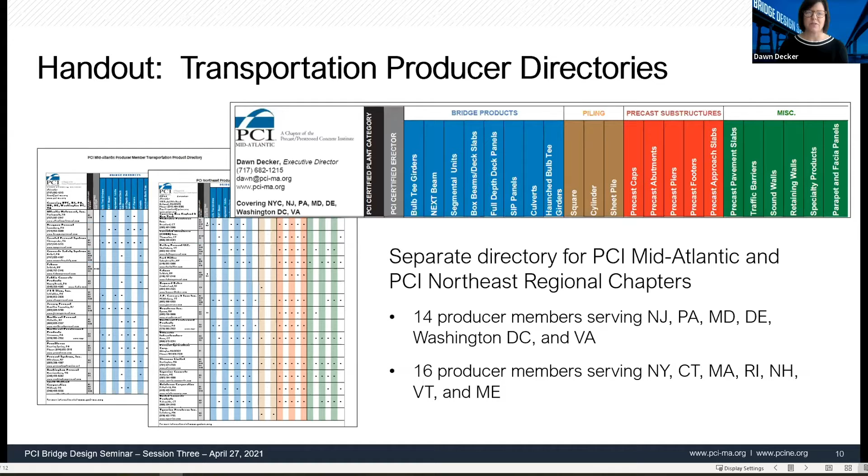PCI Mid-Atlantic and PCI Northeast, you see these pictured on the slide here. There is one each for each of our chapters, our transportation producer member product directories. So on this, you will have contact information, the name of the companies, as well as the respective products that they produce. Those products are grouped into bridge products, piling, precast substructures, and miscellaneous transportation products. Please use those, download those, and contact the producer members for a variety of services, which Rita will talk a little bit more about as well.

In terms of education opportunities as well as publications, Rita will speak to this handout, which is PCI recently published, a new 2021 Transportation Publications and Online Resources Catalog. Rita will speak more specifically to these publications as well as the on-demand learning courses that are available for you on a wide array of subjects.

Now, getting started in terms of our program today, Rita Seraderian will start us off with a review of the PCI Body of Knowledge. Following that, Reid Castrodale will cover lateral stability. JP will have back-to-back sessions with girder repairs and fabrication issues, as well as UHPC for bridge elements. And Mike Culmo will review NEXT Beam guideline updates. JP, Mike, and Reid will facilitate our fabricator panel discussion. Please submit your questions so that we can address those during that panelist live discussion.

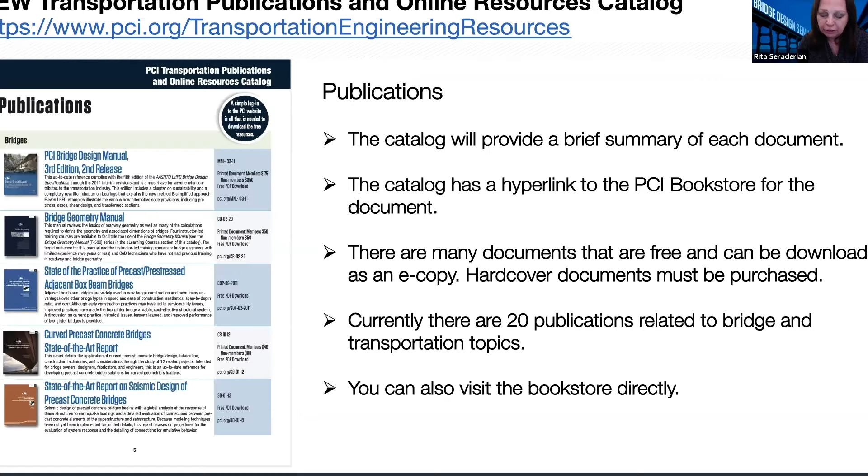If you can't find the actual transportation resource catalog and you just happen to go right to the PCI bookstore, I want to show you that you can get there in the same manner and download some of these same documents. If you go to pci.org, PCIMA, or any of the PCI.org organizations, you'll click on the publications tab, and that will open up to bookstore and periodicals.

I do want to note, we have 3 publications: the Ascent, the Aspire, and the PCI Journal. The PCI Journal is a technical publication. The Aspire is really our industry magazine related to transportation, and it's actually free. You can view all of the documents, all the past publications, on the website, and read anything that's current there too.

PCI is always looking for projects to feature. If you do have a nice bridge project that you would like to potentially get some PR, you would want to contact Reid Castrodale. He would be more than delighted to work with you on potentially getting a story into that document.

So moving back to the bookstore, if you click on the bookstore, it will bring you to a page that looks like this. You would click on transportation infrastructure, and it will filter all the publications related to that topic.

Sorry about that. It jumped on me. Yeah.

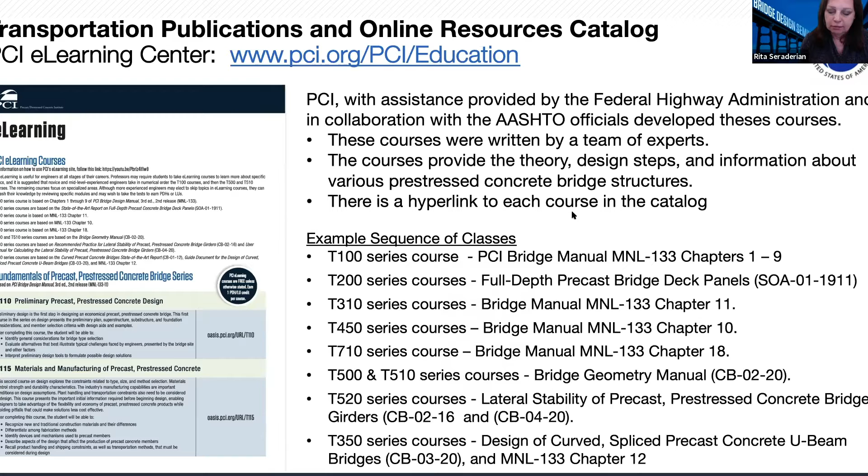I'm noticing my thing won't go forward because we keep getting people trying to get into the class, and it's locking the screen up. Again, you can get to that document through the e-learning center, through the education tab.

I do want to note on the education tab, there is also other bits of information available to you. We have monthly webinars that are free and on demand. There's the PCI Academy, which is a fee-based class you can take live. And then there's the e-learning center, which I'm going to go through here in a minute. Finally, we also offer live and virtual lunch and learn programs. If you want Dawn or I to visit, please feel free to reach out, and we would be delighted to schedule a program for your office.

So going into the actual e-learning center, this is what it looks like. You can filter the transportation courses. There are also building courses there, so it's not just transportation.

If you click on transportation, it will filter all those courses, and then you can sort them in alphabetical order. So the T100 courses would sort to the first level.

One quick note before the next slide: if you click on technical resources, there are two schools that were part of the PCI Academy. They're not live, they've been recorded. So if someone is new to prestressed concrete and hasn't taken a class at a university, and wants to learn the basics before diving into the actual bridge class, there's a 6-module, 90-minute each class that's free. You can go in and listen to it. It was pre-recorded by a professor who was presenting it, so it's a good opportunity to learn the basics. We also have an advanced version, but that's a fee-based class.

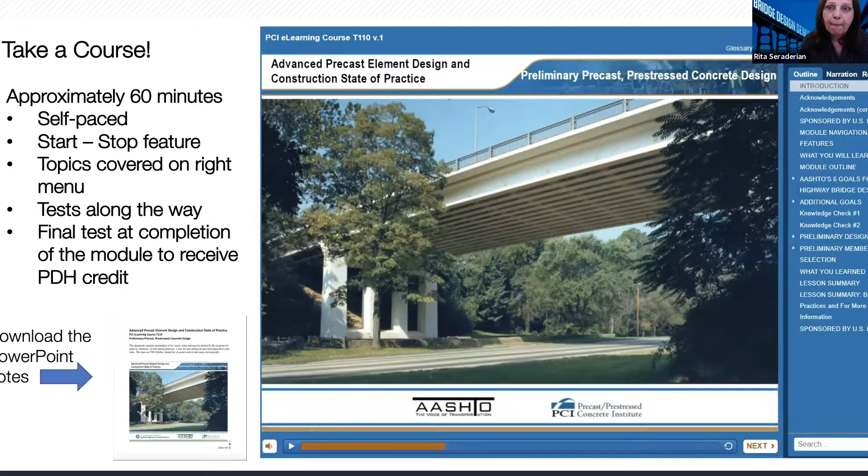So what's new? The NEXT Beam guidelines are brand new—we just posted them, calling it the second edition. Mike will go through the details of what's changed, and for those who've been using that document, you'll be able to learn what's different.

The next document I want to note that's relatively new is the full depth deck panel guideline. We posted that last May—it's got a lot more information. I'll go through a couple of things we changed in that document just to bring you up to speed.

The other available documents are the Stay in Place Deck Panel Guideline, the Northeast Deck Bulb T Guideline developed back in 2018, the Camber and Profile Management for Adjacent Members document published in 2018, and finally the Resolution of Nonconformances in Prestressed Concrete Bridge Elements, also posted in 2018.

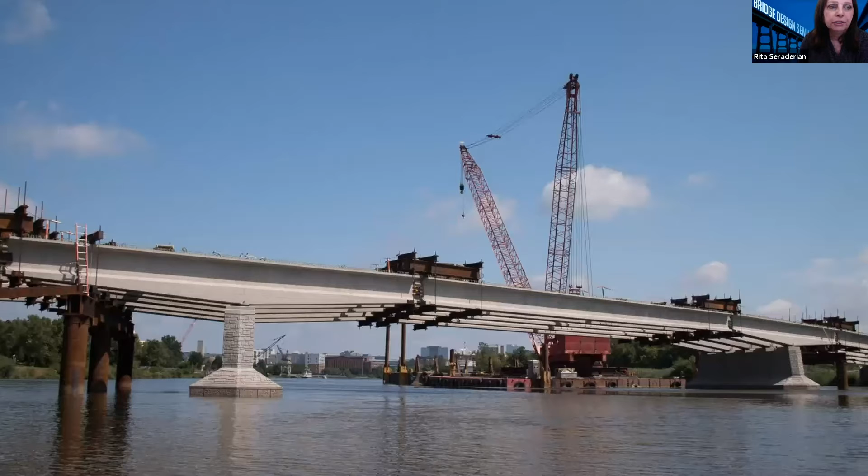Well, thank you, Rita. I appreciate that. Hopefully everybody can see my screen now. It's good to be here, and Rita didn't mention that her picture, as well as Mike Culmo's picture, and I don't know if anybody else on the call today, are also in that photograph she showed, but there are others who were involved with that girder who are still kicking around here.

Well, what I'm going to be talking about is lateral stability. And it's a topic that we're seeing a good bit of.

What we're talking about is that stability can be an issue for long girders, but one thing to bear in mind is that long is really a relative term. It's really an issue of slenderness and lateral stability rather than just length. So that's something to bear in mind, but typically we think of stability becoming an issue as we stretch out our girders, as we're able to do now with high strength concrete and 0.6 inch strands.

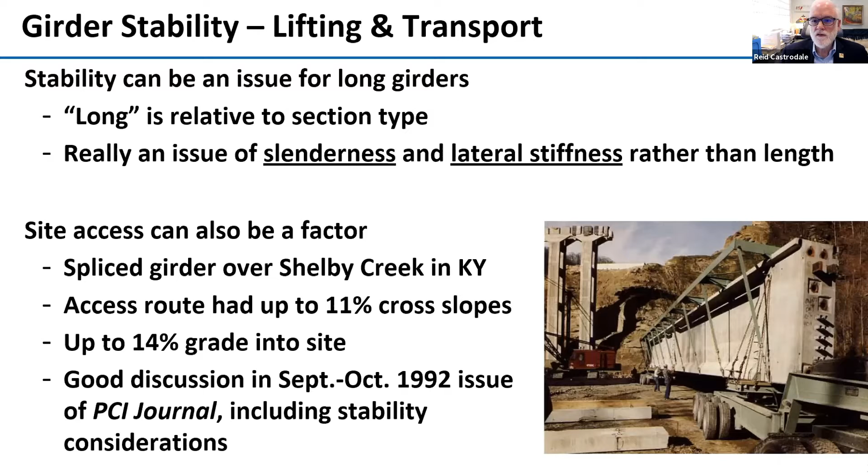So, as you can see here, they put a truss on the top flange, and they also added some strands in the top of the girder. There's a good discussion on that, so if you want to take a look at it for interest's sake. This was before we started a lot of our discussions on lateral stability, but these designers took it into account as they worked on this design, which is a good example for all of us.

PCI has recently published a recommended practice for lateral stability. There's also a spreadsheet that's been developed that executes the equations and calculations gone over in that recommended practice, so there's now the spreadsheet and an instruction manual. Actually, what you do is download the manual and then get a link for downloading the spreadsheet. Those are available on the PCI resources that Rita went through just now.

There's actually already been an errata for the recommended practice, and an update on the recommended practice is underway, but it'll probably be a year or two before it gets completed.

One thing I'd recommend is, as Rita was talking about, you can get the e-learning courses on lateral stability, and there are four of them. They're in the T520 series. You can get those on the e-learning center on PCI. So I can only hit a real high level discussion this morning, but you can get much greater depth if you take that series of courses, which again are free.

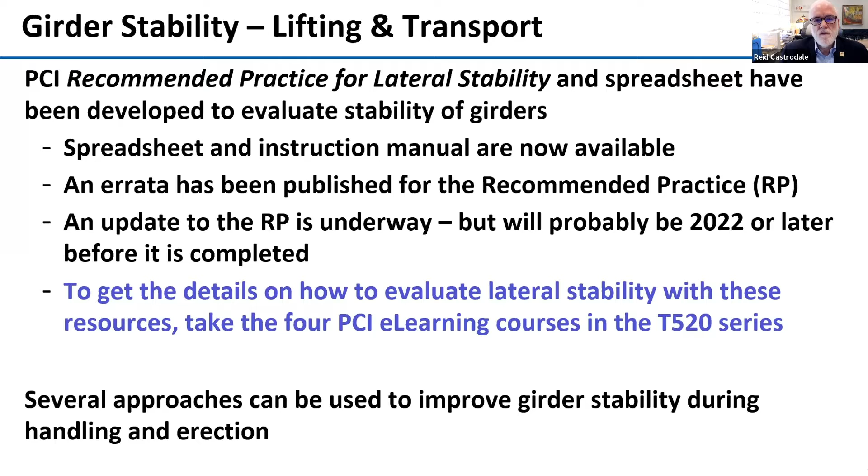Now, there are a number of approaches that can be used once we design a girder, or as we are designing a girder, to improve stability for handling and erection, and we're going to talk about a couple of those now. One of the major ones is that we can move the lifting loops in from the ends, and also the temporary supports, either for trucking or for dunnage during storage. You need to move those in and you'll improve the stability significantly. However, we have to check the stresses.

If we're lifting from further in, then we now have a cantilever at the end, which gives us some negative moment at the lifting points, and the stresses are not usually checked there when we're doing a design. So I would encourage you all to take a look at that.

Some DOTs also have a maximum distance to the lifting loops indicated either in the standard beam sheets or in the specs, and we need to be careful about that. Lifting at about 1.5 times the depth of the girder in from the end is a good rule of thumb. But if it's specified as a distance from the end, like 3 feet, it can lead to problems.

Years ago, there was a story told, probably 20 or 30 years ago up in Minnesota, where one supplier had been fabricating girders for a good while, and they knew that they needed to move the lifting points in from the end. Then a new fabricator came in, the specs said lift them at 3 feet or whatever from the ends, so they picked this long girder up from the ends and it rolled over. And they said, okay DOT, that's your girder, we built it like you told us to.

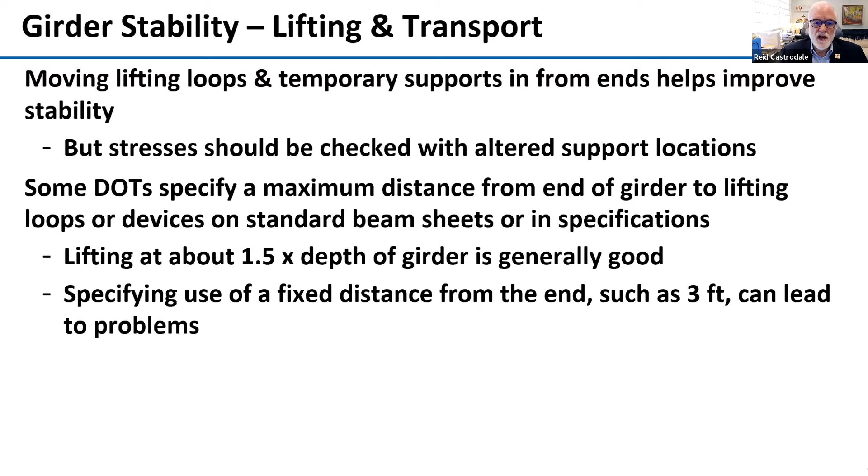They may be different. Another thing that is always assumed is that the girder is rigidly attached to those trucks. So we need to just be sure, and that's something that's in means and methods for the fabricator, just to be sure that those attachments to the truck are indeed pretty rigid, a good stiff connection.

It turns out if you raise, using a rigid device, that point of rotation above the top of the beam, then you get a longer resisting moment arm, so that improves significantly the lateral stability. There are a number of approaches you can see here with rigid links coming up through the top flange, like here and here. There's some things that are attached on the outside.

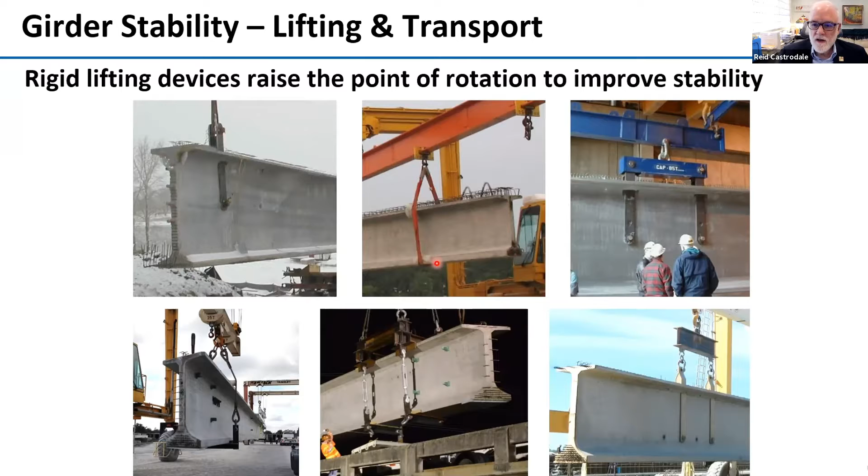And you can also use a sling. Now, a sling itself is not rigid, but when you put it in this configuration, it does become rigid and can be used to improve the stability of a girder.

In some cases, exterior frames are applied. This one right here is the Shelby Creek Bridge that I mentioned earlier. They had a nearly full length frame attached. Here are some other frames that have been attached to these girders to improve their stiffness, to improve the lateral stability.

It's not always required. In fact, it can, in most cases, be taken care of now that we have wider top flanges on our beams.

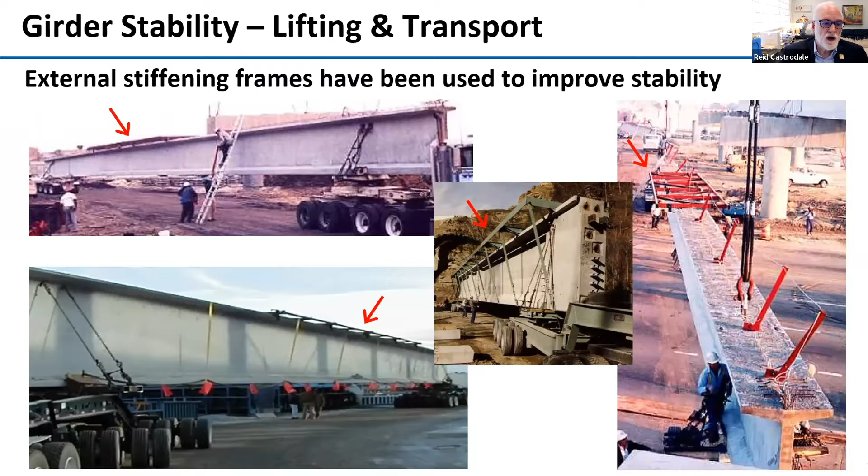In design, we can also add top strands to the top flange, and they can improve stability because it makes the top flange less likely to crack, which is when you lose stiffness and then lose stability. It improves the stresses for lifting if you're moving in the lift points, but it does affect some designs. I discussed this in a previous presentation in this webinar series.

In most states, designers aren't given the responsibility to consider conditions other than transfer and final conditions on bearings. So that's all that we have in the past typically designed for. However, that's not what we really need to take a look at.

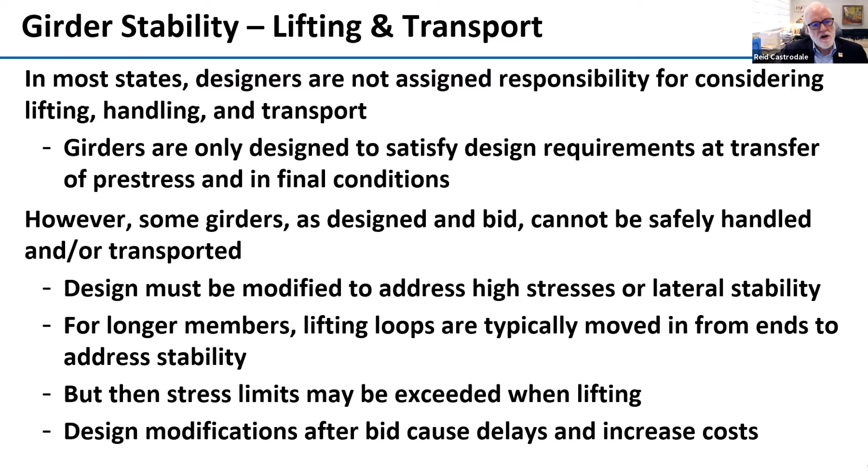Some pre-stressors have had the experience that they receive a girder designed, and as the girder was designed and bid, it really cannot be safely handled and or transported. In that case, the design has to be modified to address either the high stresses or the lateral stability issues. But typically what's done is moving the lift loops in, but as you move the lift loops in to improve the stability, then you exceed stress limits when you're lifting it, and a design modification is required, or adding reinforcement or other strands, whatever it might be.

And anytime you have a design modification after bid, that causes delays and increased costs. So we need to consider that.

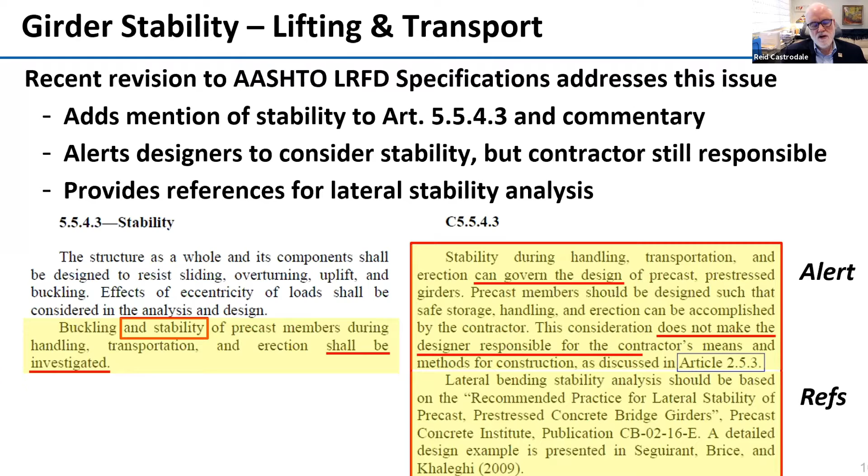What's being encouraged now in the specifications is that we consider stability. Here we can see some text out of the LRFD specs, the 9th edition, 2020 version. The first item speaks about adding stability for what shall be investigated. This is 5.5.4.3 on stability in the specs, and the words 'and stability' were added back probably 4 or 5 years ago. In addition, the commentary alerts designers that handling, transportation, and erection can govern the design. But if we consider it as designers, it doesn't make the designer responsible for the contractor's means and methods. This commentary also gives references, the recommended practice from PCI, and a detailed design example. So it's good to be aware of this information that's now in the specifications.

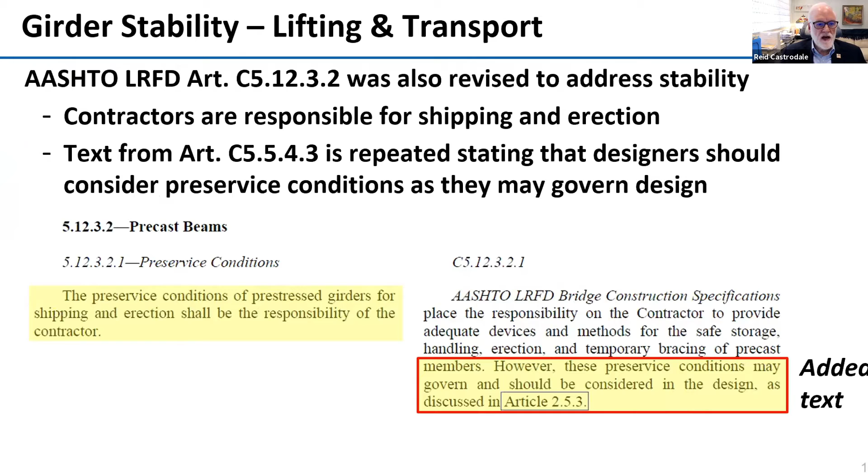Also, there's some text in section 5, article 5511, on the specification side. This text has been in the LRFD since 1994 when it was introduced. It says that stresses and deformations for critical stages during construction, stressing, handling, transportation, and erection have to be considered. So that puts us on the hook to consider them. We aren't responsible for getting it there and making sure it can be erected safely, but we need to consider that.

But how do we know what to do? How do we know where the girder needs to be lifted? How do we know what kind of transportation is going to be provided and all that sort of thing? Well, we have a couple of good examples of some approaches to handling this.

WashDOT, Washington State DOT, has developed a great approach. They've developed this over a number of years, so it's been tested out and they've shaken the bugs out of it. They do not want fabricators to change a design in order to make it work. They want a girder that when it's bid, can be fabricated using that design. So they don't want designers or fabricators to have to go fiddle with the strand pattern, move lifting loops, all that sort of thing. So all of that is considered in the design. Designers check those using parameters provided by WashDOT in both the specs and the bridge design manual, and that way the designers can handle it. Their design software up there also includes all of that information.

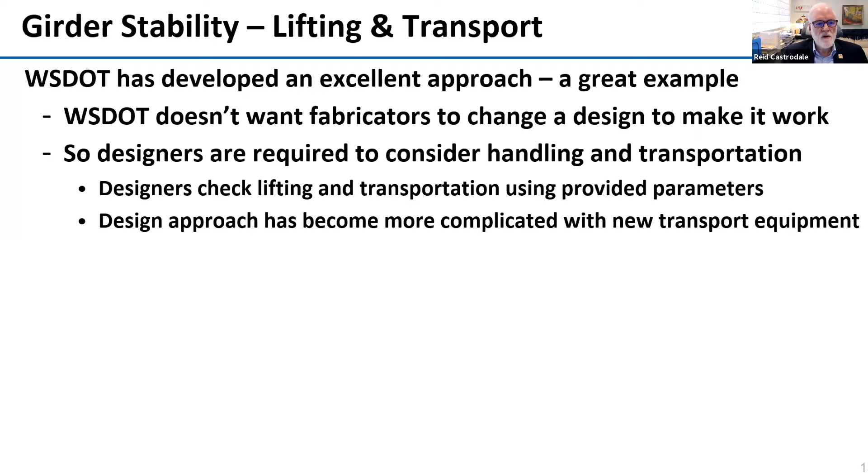It has gotten a little more complicated because they've gotten some new transportation equipment, and there's an approach they've come up with to deal with that. There are a number of good references. I'd highly recommend anybody wanting to be proactive and do some lateral stability analysis to check these WashDOT references. There's a PCI journal article, there's an Aspire article, both are excellent. The bridge manual and their standard specs both address lateral stability and provide information needed for the evaluation. And there was a great presentation that Rick Brice gave from WashDOT to the Georgia Carolinas PCI meeting back in August a year ago, with a PDF of that presentation and all the supporting information, including the bridge manual and standard specs sections, available at the reference provided.

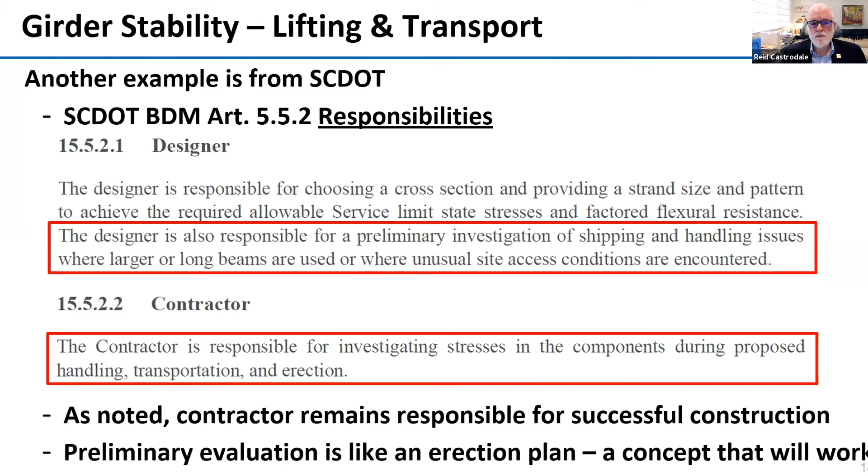South Carolina DOT, down in my region, states things this way: they give the designer responsibility for preliminary investigation of the shipping and handling issues. But right after that, they say the contractor is still responsible for taking a look at it, so he remains responsible for getting the girder there and erected successfully. The preliminary evaluation is essentially like an erection plan, making sure that girder, based on some assumptions you're making, can be successfully fabricated, transported, lifted, and handled. So it's essentially like an erection plan as far as how responsibility is handled.

One other example is from Georgia DOT. They actually have a table in their bridge manual that provides maximum beam lengths for each of the girder types they use. Those maximums are set based on stability considerations and also an assumed distance in from the ends for lifting loops. Designers can use designs greater than that, but then they have to do a stability analysis.

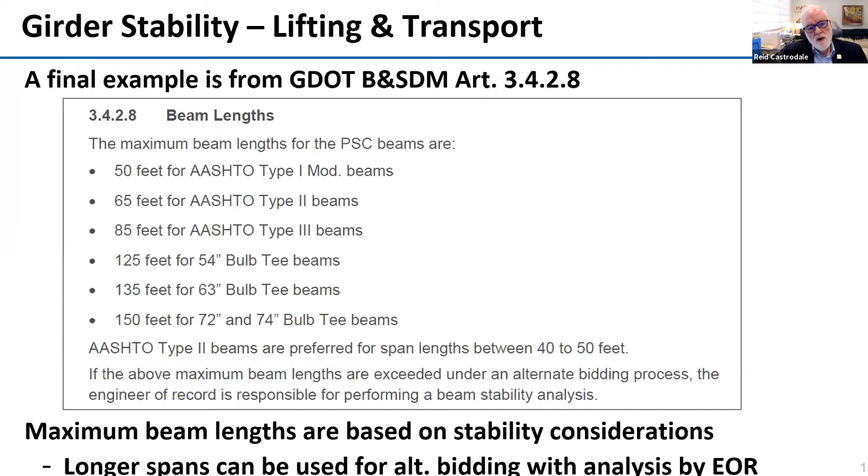So in summary, we're starting to use longer spans. Lateral stability may become an issue, and also stresses can be exceeded, and in some cases design modifications are required for girders that are received as designed.

But now we have some good information. There's some new information and requirements in the LRFD specs that have helped out and better defined the responsibility of the designers. And PCI has developed some excellent resources as well. So I would encourage owners as well as designers to consider implementing these new requirements.

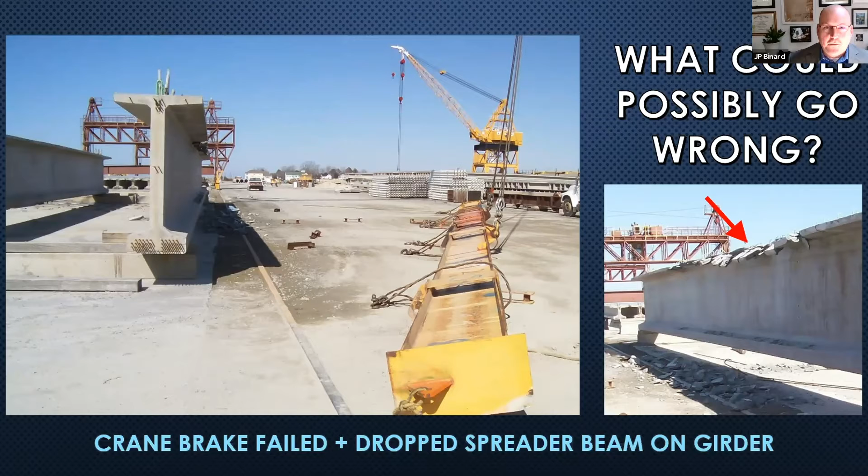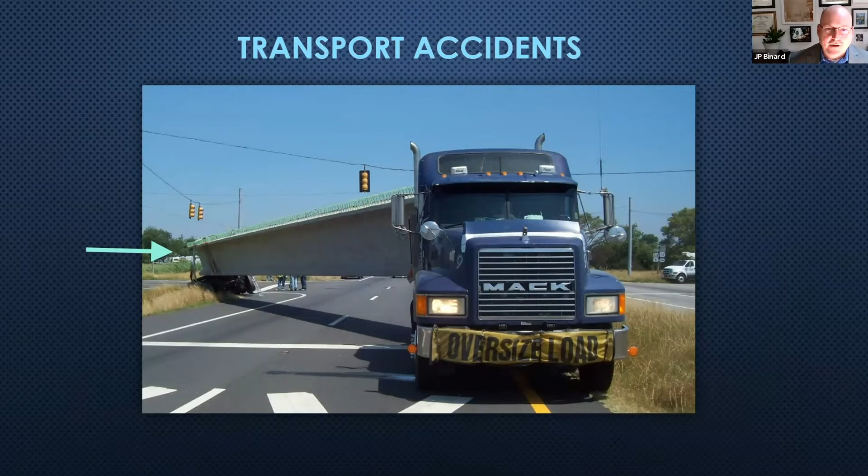So when we're in the fabrication facility, we need to make a game-time decision, right? We have something that may not be conforming. We don't know what to do, but we have to decide quickly.

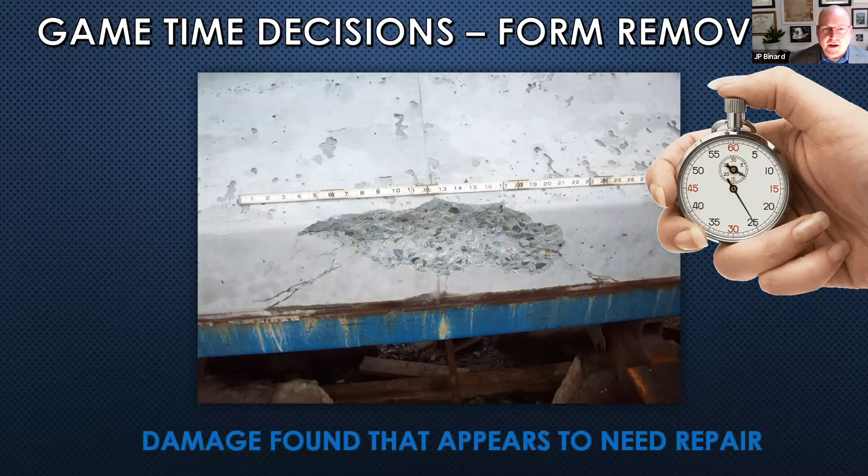So there's lots of things we have to take into consideration, right? Is the repair best before detensioning, or can we do it in storage? How will the damage affect the girder? What repairs prior to detensioning will be pre-compressed? We want to keep that section elastic, right? Keep it pre-compressed.

And if you do an on-bed repair, as Reid had mentioned, the cycle time and things that come into play for fabrication—you can't necessarily hold up the production to wait for an approved procedure. So these answers are always needed fast, and they have to be quickly executed.

And so this is really why, back in 2006, the PCI MNL-137 was created—the Manual for Evaluation and Repair of Precast Prestressed Concrete Bridge Products. A group of owners, designers, producers, consultants, and universities all came together to look at what are the common things that occur at a plant and what are the reasonable things that can be expected for the plant to administer under the QA/QC plan.

I meant to mention as well that PCI Northeast, as Reid pointed out, updated this manual in 2018. PCI Northeast has a broader product base where they've expanded it to include deck slabs, for example, and substructure units. I greatly encourage you to look at that resource as well, the link is included from the Dropbox. Currently, PCI MNL-137 is undergoing revision and will include a lot of those things that are in the Northeast publication.

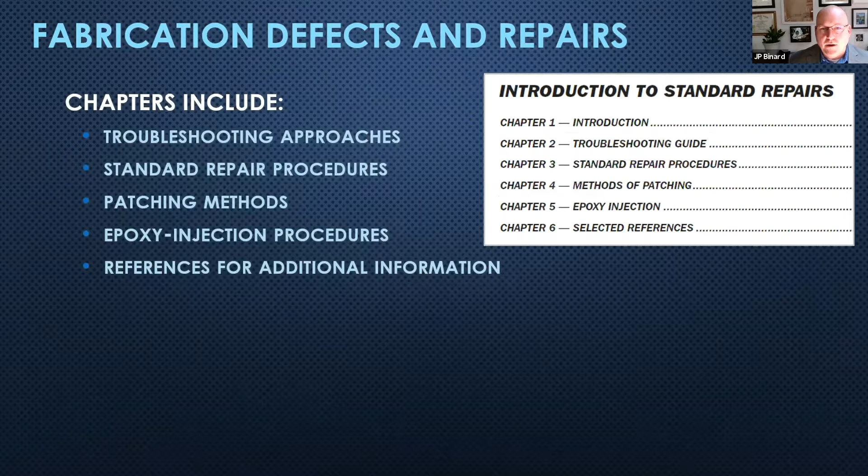The layouts are similar between the two documents. There's an introduction, troubleshooting, standard repair procedures to keep in mind, methods of patching, epoxy injection for cracks, and then the references that are available. It's broken down into causes, prevention, engineering effects, and repair considerations. So here's the general layout of the manual. If you're not familiar with it, I strongly suggest you download it from the PCI website. It's a tremendous resource, even though it was published in 2006 and is being updated. A lot of the information will be untouched and preserved.

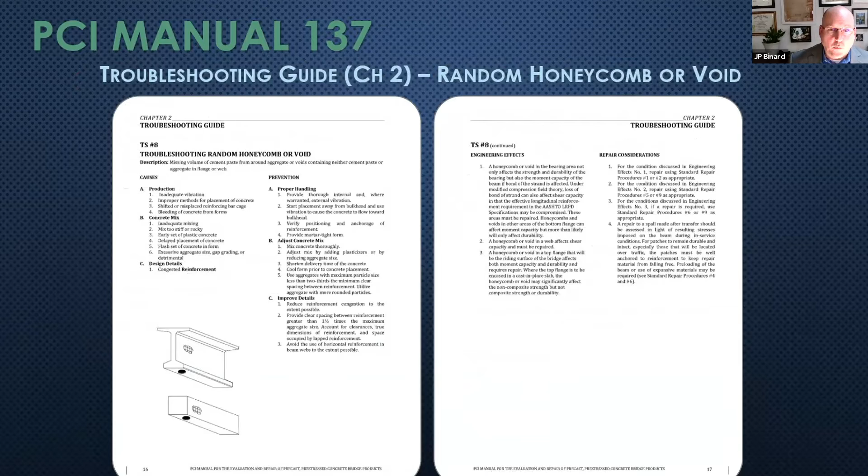So you can see there's causes. For example, this was a honeycomb or void, whether it be a pile or a girder. At the end of the pile or girder, you can have a honeycomb or void, or in the web. So there's causes - it could be vibration, it could be bleed, the method of placement, it could be the concrete mix, and it could be the design details. Maybe it's overly congested at that location.

The prevention is also included side by side. It could be providing better internal or external vibration - external vibration takes place on the forms. Adjust the concrete mix - lots of folks move to SCC for these kinds of reasons. Or improve the details, reduce the congestion, perhaps do away with some of the splicing, like Reid had mentioned, I believe, in the first session. And avoid the use of horizontal reinforcement - sometimes that can cause the concrete to hang up.

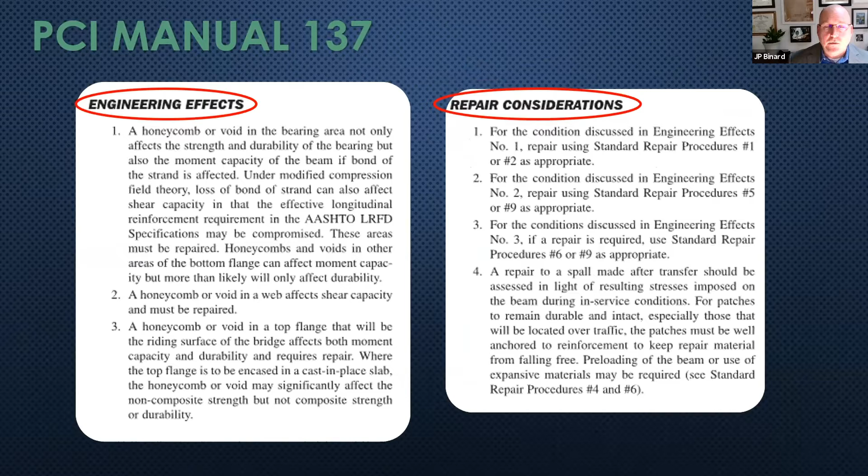It talks about the engineering effects - how will that honeycomb or void affect the product, if it's in the bearing area, for example. And then the various repair considerations. So this is somewhat dovetailed, if you will, with a troubleshoot item and then a standard repair procedure that's corresponding to that element.

What items are not currently in that manual is really what we've been focused on in the Bridge Producer Committee for PCI. So sweep, for example, is one. Camber and camber variability, there's some bars missing as a common problem, and then full depth deck panels. As I mentioned, the PCI Northeast publication shows substructure elements, unique products that we're producing more and more in these two regions that are not necessarily addressed directly in this manual and are very important.

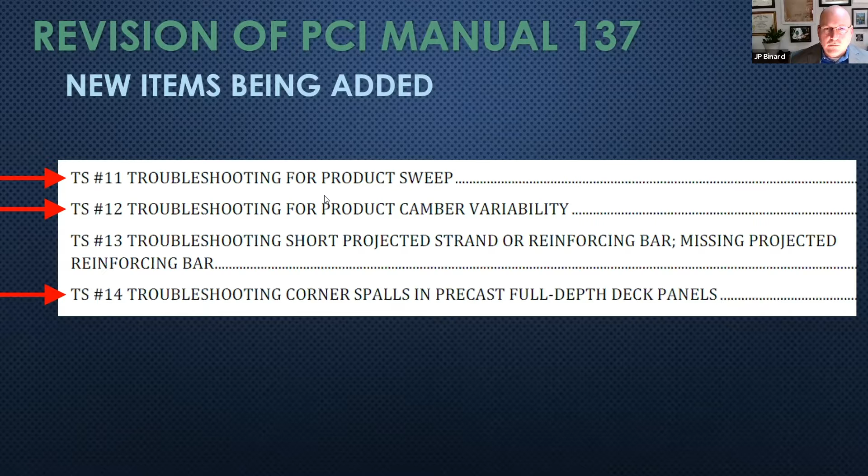I'll also note that we're going to include a section on the materials that are used, the service life performance. There's been a couple publications about at least patching materials and the key components to those patching materials in order to end up with a serviceable repair. It should be noted that this manual, this resource, the knowledge base that produced this manual originally, has been used and been in service for several decades now, almost two. The concepts that were there were long utilized before, but now they've been adopted nationally instead of regionally, and so you end up with serviceable, durable repairs because they're currently proven by empiricism.

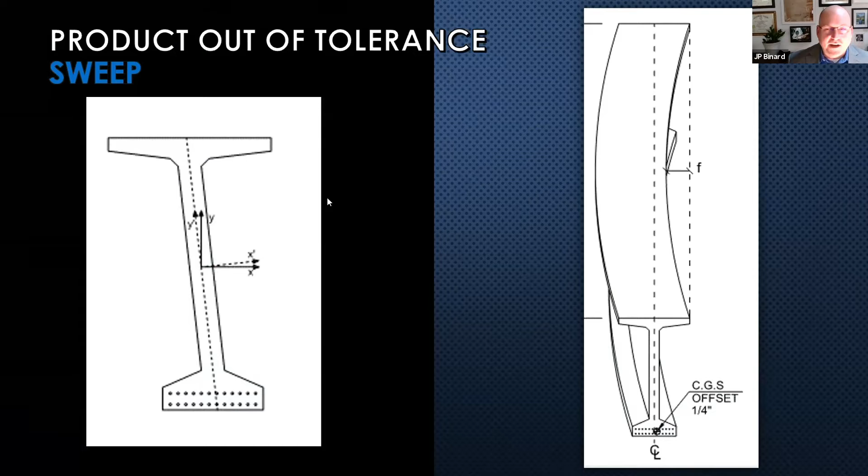So sweep can be a major issue for lateral stability, as Reid mentioned. It can be a major issue for fit up. And as we continue to extend our spans, that number starts to get larger each time, so we're working on understanding the phenomenon better. There are three excellent articles published in Aspire on this subject. We've taken that information and we're trying to take that information and expand it. So this is sort of an unpublished first draft that we've worked through in the Bridge Producer Committee.

So what are some of the reasons, the causes for sweep? You might say potentially misalignment prior to casting. You could have incorrect placement of strands, so you can actually put some eccentricity on your product, and that could result in a sweep after casting.

Lifting and storing, oftentimes producers store on concrete or well-graded material, but sometimes the dunnage may not be level or true. A lot of our dunnage is hardwood, and sometimes that can result in really setting the girder and creating almost a situation where you're inducing creep. I'll get to the prevention or the solution next.

And also in the field, sometimes you can have a slope bearing, and so you can get a measurement of sweep that may not be accurate.

So some of the preventions: obviously ensure your formwork is level and secure. That's always within the purview of the producer and the QA process, the QC process. Make sure your strands are within tolerance—if a whole group of straight strands are off by a certain dimension, that can create an issue.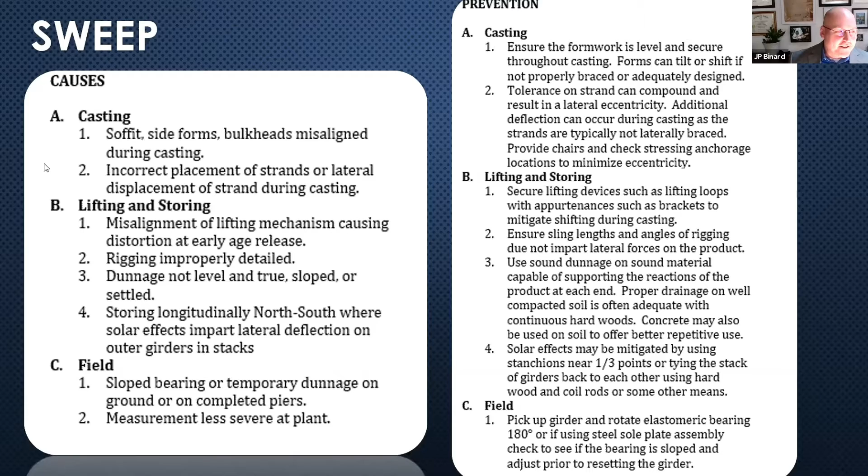So Camber two—we're trying to kind of find what is the real causes and prevention methods. From a producer standpoint, when a design is created, really we're fabricating products, and those products result in the camber that's imparted by the pre-stress force, right? There's a few things that occur.

We might have, for example, various curing durations—that's just a function of cycle. But there's also tolerances, right? There's always tolerances to these products. PCI MNL 135 is a tolerance manual. PCI MNL 116 is really our QC/QA manual, and all of these are available through the resource guide that Rita mentioned in the beginning.

And so they give tolerances to each product. You might have a tolerance in your web width, you might have a tolerance in your height, you might have a tolerance in your flange. Your top flange especially might have various heights due to the rake finish. These can play a minor role, but as the sum can play a major role in some of the resulting dimensions—the pre-stress force, your allowed elongation tolerance, and then obviously if there's an error, then that can be.

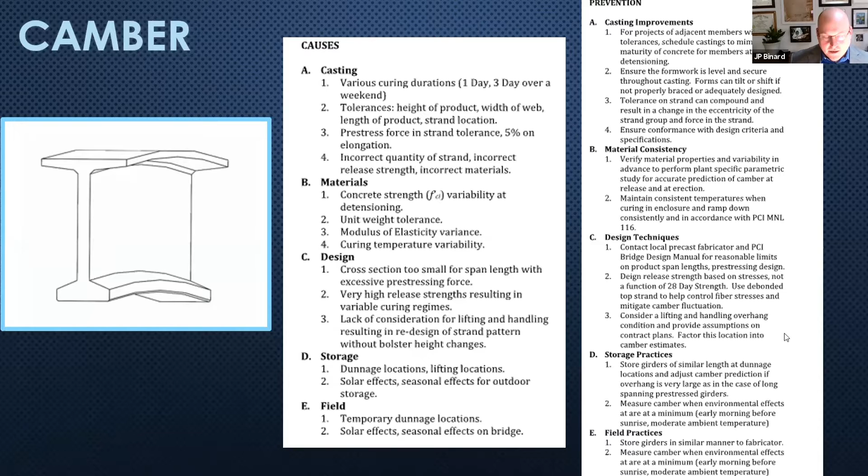So we talk about repair considerations. Really, one of the simplest repairs, which Reid brought up years ago, is to adjust your bearing seat elevations. A lot of bearing seat elevations are cast in place, so if you recognize an issue where you're getting excessive camber early on, and you haven't poured those bearing seat elevations yet, you can simply lower those seats based on the as-built information. That's where collaboration, going back to my first slide, is so important in building this bridge, because a higher camber is not necessarily indicative of a poor quality product. It just takes communication.

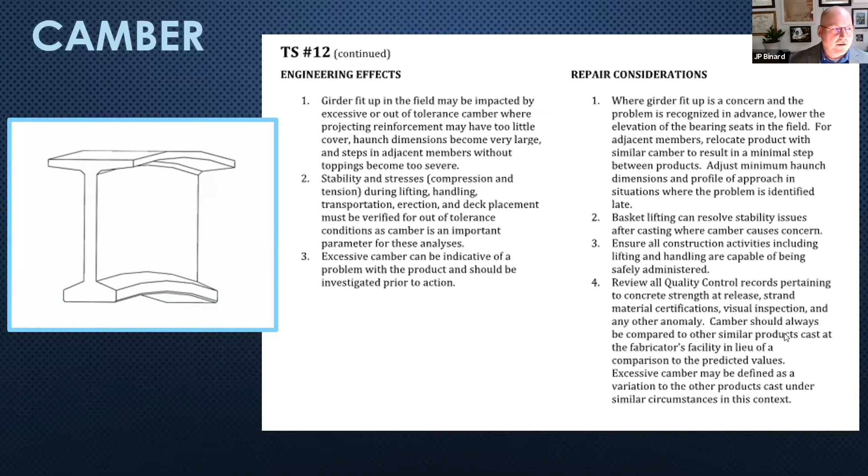So this is an issue that's come up more and more in the region. I just wanted to talk about it broadly. I think we may bring this up in the roundtable. And this is the 90-day rule.

For those who aren't aware, this is an AASHTO provision that if you have simple span girders made continuous for live load, you can use an assumption that a girder is at least 90 days old, and then you can essentially ignore continuity calculations. Continuity calculations can be challenging, and there's a publication by PCA way back in the 60s that talked about this issue originally. There's an NCHRP study that was done after that, and the results were then incorporated into the current AASHTO provisions. So it gets really complicated when you have odd span lengths when you're trying to do fixed end moments.

In general, this clause has created a little bit of heartache for producers, and I'll tell you why a little bit later. So this is the general clause, okay? The minimum age of the girder, and then we have to calculate the stress.

I'm going to break this item here into its components. Essentially what you want to do is find out if 50% of the live load, the temperature gradient, the superimposed dead load, barrier, wearing surface, creep and shrinkage, and settlement are compressive. Settlement usually is not considered, since you have allowable settlement in your design, so it's not going to impart a great load into the structure.

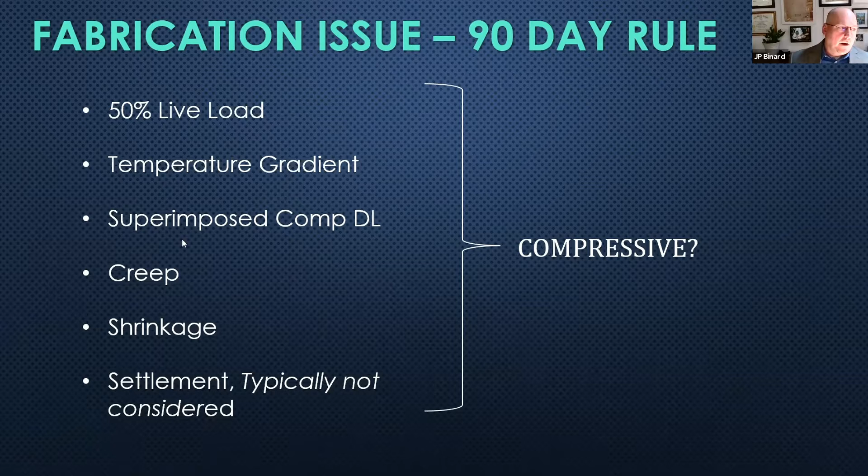I will tell you that typically these are compressive anyway, so we really have to worry about the creep and shrinkage part of it.

So the pragmatic side of this is if all of these girders have to arrive to a job site and they all have to be 90 days old until the diaphragms are poured for continuity, it creates a very difficult relationship between the producer and the contractor and the schedule.

So if a project is released in January, invariably the contractor wants to pour their deck, especially in the Northeast region, by summer. So if that job is released to the precaster, they have to produce the shop drawings, the shop drawings have to get approved, then we have to go into production - probably quite a few girders, typically at least for a multi-span bridge in this case. And so they have to cure, make the strength, and all of them have to be ready by spring.

Well, that's not pragmatic - not always, right? Some projects allow enough lead time, some girders are produced 2 years in advance. It varies by schedule, but a lot of times, because we're seeing a rapid rate, especially in accelerated bridge construction, we're seeing that more and more of these products are having these issues.

So how about a plan B? Why don't you just design a simple span and detail for live load continuity? This provision no longer applies.

Now, I don't think this is the best approach. I'd like to see the region potentially do some analysis. I've done some analysis on the thermal gradient, for example, and how often that, depending on spacing and span length, remains compressive.

So that would be good information to share with designers. But a plan B is you just design a simple span. Typically what you'll find is that the end span of a continuous unit is controlling your design anyway, and you can probably work within the stress limits offered by LRFD or by your specifications and meet the service 3 stresses, and definitely on the interior spans. So that's been our experience.

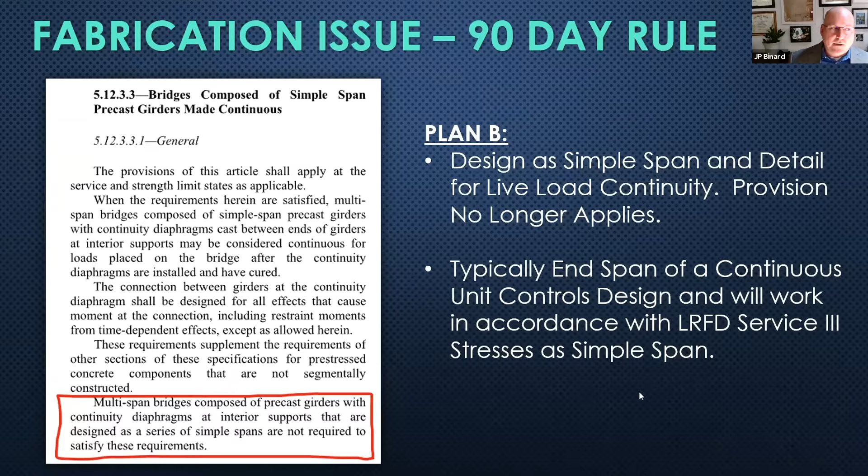So I have a couple slides. I'm not going to go over them in detail, but just to show you, because I'm running out of time, we've done some research on this in the past. The original NCHRP and that original clause was based on very low early release strengths, kind of a 4 KSI, 5 KSI design. This is actually an actual bridge in Virginia that we looked at, 62-foot span length, and negative is compressive. So, yes, you need 90 days.

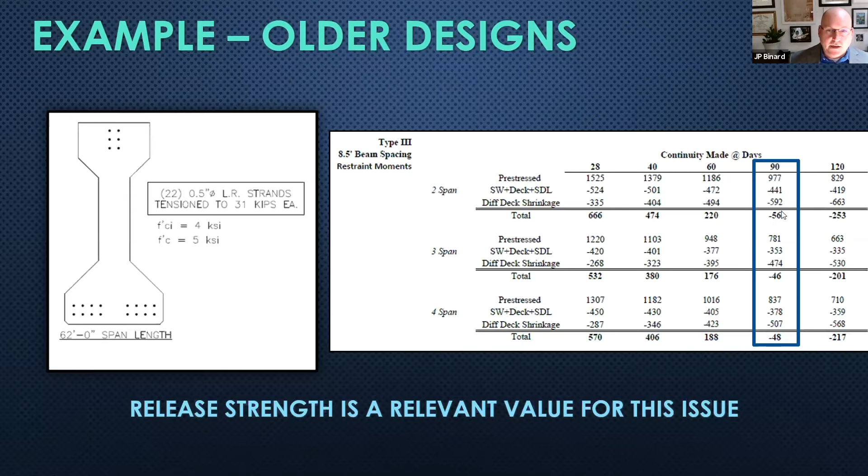And a design you might use today might be a 45-inch bulb tee, PCEF shape, and you might use a 6.4 KSI release and an 8 KSI 28-day strength. Some of the questions that have come up before about strength - you run the same math, and you find out you can make continuity at 40 days. So this is newer materials, newer information. Unfortunately, the code is always a snapshot in time. It can't include everything. But I encourage this conversation in the roundtable and how that can affect producers.

So this is my version of the fabrication issues that we run into. All right, so moving along - into a snapshot in time and the code and how they try to keep up - let's talk about the future.

So, ultra high performance concrete. This is a subject I'm very passionate about. As stated, it's an opportunity to reinvent steel and reimagine concrete. So we can, again - I'm teamed up with Cor-Tuf UHPC, and that's how we partnered with Precast Systems as well to do some cool stuff. All right, so I'm going to talk about what is ultra high performance concrete.

I'm not going to go into too much detail on that. There's a lot of great resources already out there. In fact, recently at our ACI 239 meeting on UHPC, everybody did a presentation and didn't even talk about what is UHPC. So it's pretty cool - I think a lot of people are understanding what the material, the technology is, and what's out there, and what it can be used for, or you have experience firsthand on existing projects. So I'm going to talk about where UHPC is currently being utilized in the U.S., and who else is using UHPC, and then where could we use UHPC as precasters, producers, designers.

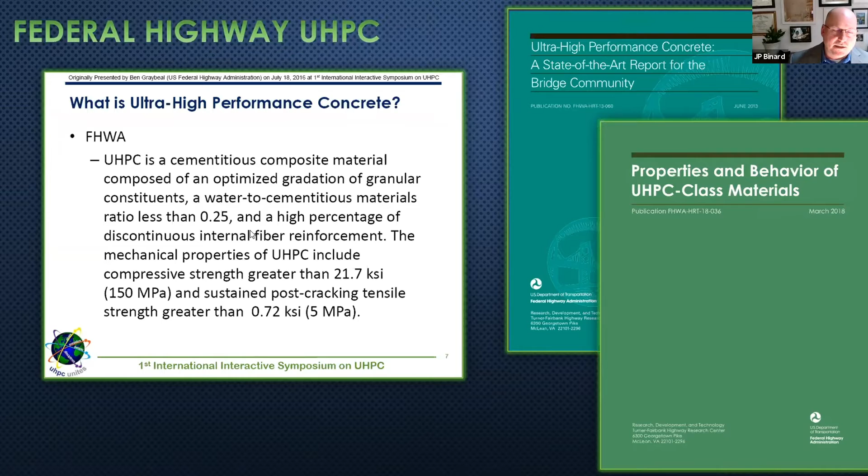So we have a post-crack tensile strength of around 1 KSI, and most of the material characteristics I'm going to be showing you today are 1.2 KSI. I'll go into that in more detail, but there are lots of publications available currently for you to review more about this information.

Federal Highway currently is working towards a guide specification to deliver to ASTM in June of this year. This has been an ongoing project and will be a really big step for UHPC to be used in structural elements. There's a variety of publications they're working on, including a standard method of testing for uniaxial response of UHPC, which is an ASTM provision that would allow a standard for using the test, which has been an impediment. Various journal behaviors, mechanical behavior, interface shear, flexure, shear design, pre-stress loss—all of that is coming through various publications. You see ACI Materials, ACI Structures, and they're all being approved through the Federal Highway Office of Public Affairs. So I asked if I could share this, and I was told I could.

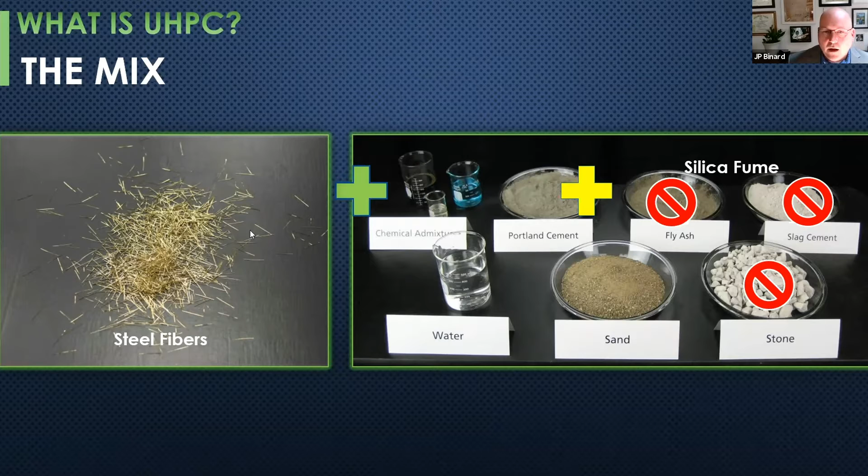So what is UHPC? As I said, it's steel fibers, high volume fraction, chemical admixtures, a lot more cement, sometimes up to double. You don't typically use fly ash and slag cement, although some do. You typically have a high volume of silica fume, say 10%. You don't typically use coarse aggregate—a lot of UHPCs do not, there are very few that do. So your largest particle size is the sand. And then, of course, you use water—about the same amount you use now. The admix you use is about an order of magnitude more than your high-performance concrete mix.

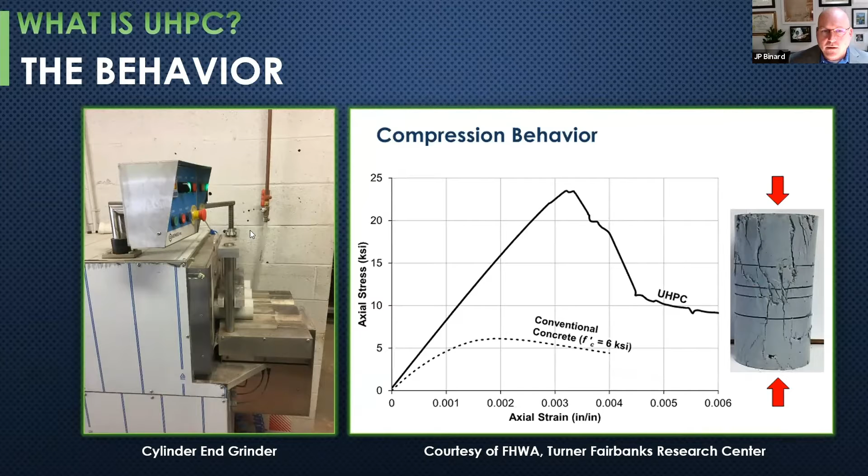So what you get is a highly compressive material, 22 KSI, let's say for argument's sake. The minimum threshold for UHPC, as stated by PCI, ACI, CSA, and a few others, is 17 KSI. Some people put it in two classes. We can get breaks up to 30 KSI. So compression is pretty amazing stuff with that volume of cement. But what's really great about the material is the tension.

So what does that look like in a larger specimen? These are two products that Precast Systems Engineering was in charge of producing—we actually got a contract for Federal Highway. The top was produced in New Jersey with one UHPC. The bottom was produced in Florida with Durastress, using another UHPC. And they have the same design, which is depicted on the right. These are 0.7 strand, they have a 3-inch web, and they have no shear reinforcement whatsoever.

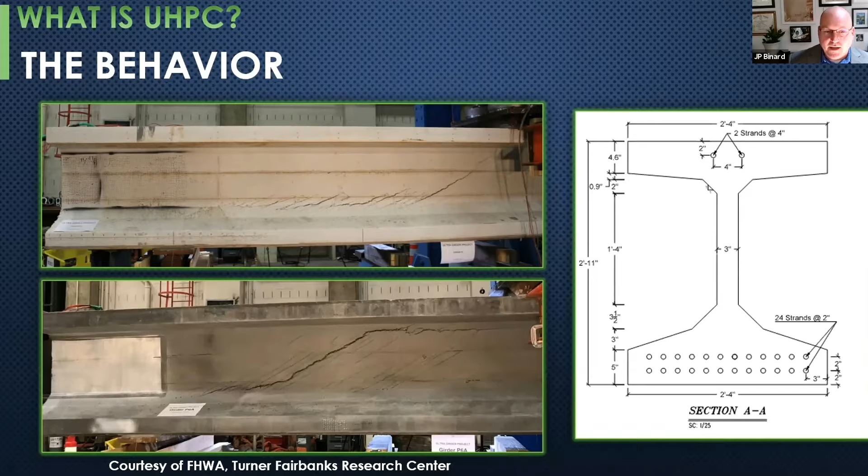Although the first crack differed between the two materials—this one actually has a higher first crack, this one has a lower first crack—the localization strain, the total moment at localization, or total shear at localization, was within approximately 3 kips. So what happened was, first crack was higher over here, so the load to first crack was higher, but the load to localization was equivalent to the load to localization here. The first crack was lower here, but the strain was longer, if that makes sense—probably does to the structural engineers. What was, I think, remarkable about this is that these two girders were cast in different ways with different UHPCs, and the result of the shear model was a nearly identical failure load. So that really kind of shows that UHPC is truly market ready.

Again, the PCI webinar does a great job of explaining all the durability characteristics of UHPC. Chloride ion diffusion is what some people measure, Coulomb values is what some people measure. Treat Island specimens have been out there for a couple of decades. And ASTM C1856 is a resource you can use today—it's an approved ASTM standard that we use for UHPC. You can see the order of magnitude better in chloride ion. If you want a Coulomb value, you're usually looking at, for a steam-cured specimen, less than 100 coulombs; for an ambient cure, less than 300, maybe, for typical UHPC.

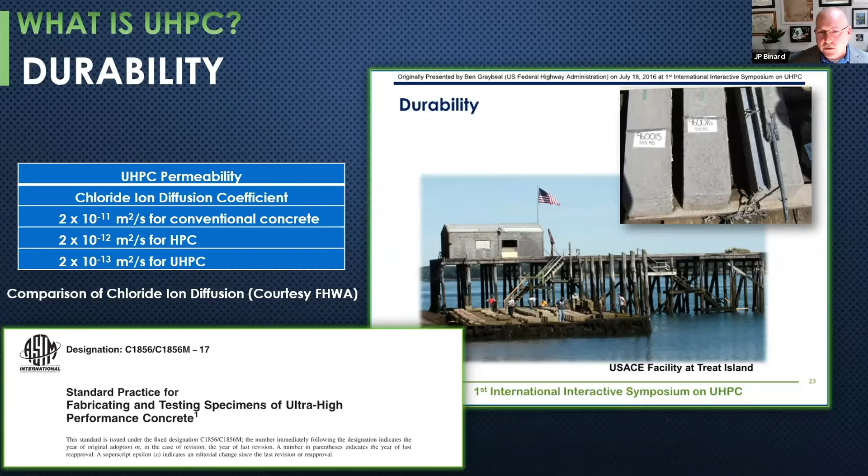So pretty incredible stuff, and I encourage you to learn more about it. All right, so let's move into the nitty gritty.

So where do we know about UHPC being used? We know accelerated bridge construction typically, right? So using it for joints is just an obvious material. What used to be the weakest link is now one of the strongest. The precast material cracks and the joint doesn't, so we don't have leaky joints. We don't have post-tensioning, and there's a guide spec out there. This particular application has been studied since the early 2000s. It's a great deployment of UHPC.

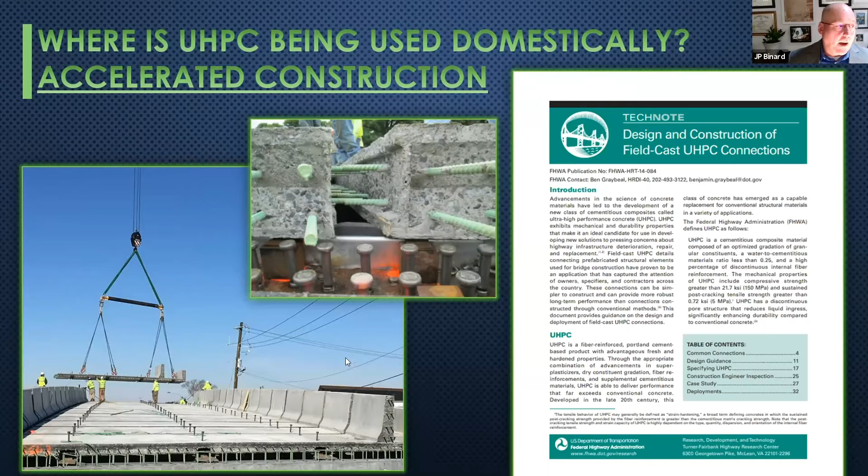It's really exposed the opportunities domestically, and why a lot of us are pretty excited about it. Where else is it being used? Well, link slabs or repair of link slabs is an often place, or new link slabs. Bridge deck overlays is a whole topic that a lot of folks are very interested in, rehabilitating bridge decks, repair of bridge piers, and then repair of corroded steel girder ends. There's some testing that was done at the University of Connecticut and implementation in Rhode Island. That's really good.

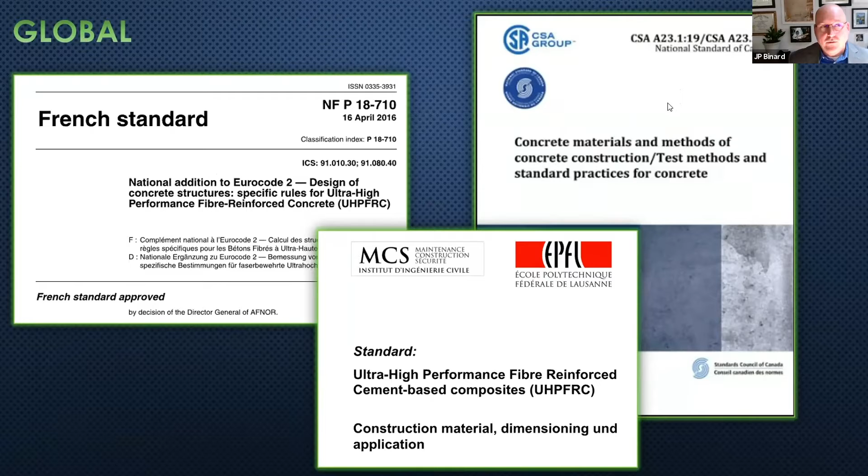Globally, well really, other folks are ahead of us. The French were really pioneers for UHPC, and so they have a 3-part code that's already established and being used globally. The Swiss also have a published standard, which is not quite as in-depth as the French, but a very good first principles approach. They were very much on the leading edge of UHPC. And recently in 2019, the CSA adopted in Annex U a UHPC specification, which is really for all fiber reinforced concretes.

So one of the things that got me interested in UHPC was going to Malaysia. I had the immense pleasure to go with the PCI Technical Quest in 2016 and meet this gentleman with a water bottle, Dr. Voo, who many of you may have heard about by now. Just an incredibly energetic individual who's both a research scientist and a designer, and has accomplished over 175 bridges out of UHPC - record spans, record practices - and really we're still well behind what he's accomplished. So I published an article about this in 2017, I think it was, which depicts that whole trip. There's also a publication in Aspire on the same event.

So here's kind of what he's doing now. If you read those other publications, you'll see other projects, but I thought this was really cool how he just keeps growing his product model. This 180-foot span, about 13'2" on center, 55-inch deep tub, includes the deck. The deck was actually post-cast and installed with UHPC. One of his fundamental philosophies at his plant is basically one product is one batch - I think that's why the deck was cast secondarily.

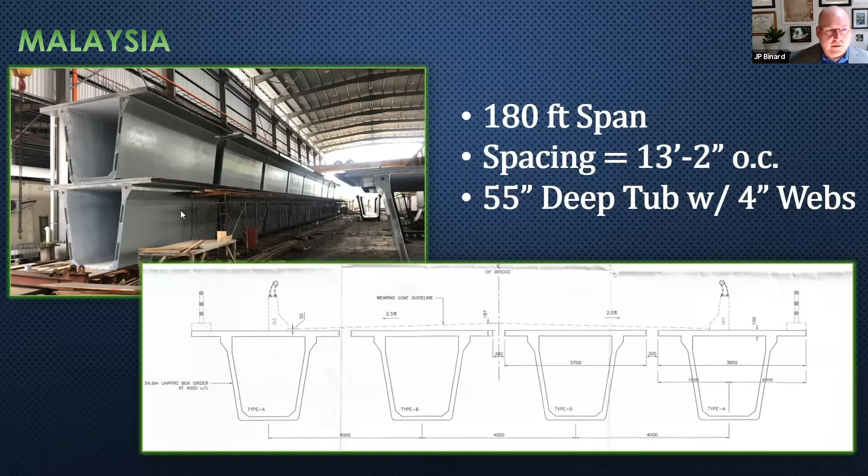So this is actually a span up top here. You've got 1, 2, 3, 4, 5, 6, 7, 8, 9 segments, around 20 feet apiece, and he's able to stack them. Very much a refined finish that you can get out of UHPC, and I think Dr. Voo's work is very elegant in that regard. This is actually a diamond plate finish - we were standing on that bridge in that picture before, and that was cast upside down. So that's actually UHPC on that finish.

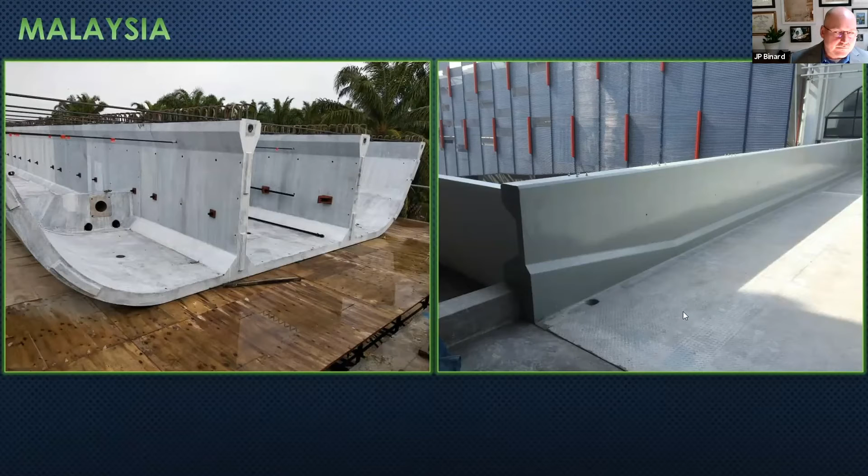All right, so what are we going to do here in the United States? We've talked about this quite a bit. I'm the chair of the subcommittee to the Committee on Bridges at PCI, and we've looked at various options for how to implement UHPC swiftly in the United States for structural elements, and how to do that in advance of a code, or along or concurrent with a code. The PCI research is really focused on beams primarily, so we looked at other elements. My background's more in the marine sector, so this is kind of a marine bridge, if you will, but certainly can be applied to land-based structures as well.

So the committee voted, and we decided that piling was actually our best fit. But that doesn't preclude the use of UHPC in other elements - we're just focusing on piling right now, as most precast pre-stressed piles are driven, so therefore you get immediate results on their performance.

But I will say that in other cases, UHPC just makes a lot of sense, because if you have a place with a lot of labor and a lot of material, and typically the rule of thumb is if your cost per cubic yard is like $1,500 to $2,000 a cubic yard, well, let's look at UHPC - you can usually get about half the section. In this particular case on the left, crack control actually governs, so wouldn't you like 2% by volume discontinuous fiber to help control those cracks, or help you operate with tensile strength? Or exotic materials - this is stainless steel rebar and a segment with epoxy, which gets to be pretty complicated. So if you can actually omit all that steel, or most of that steel, you can really streamline your casting.

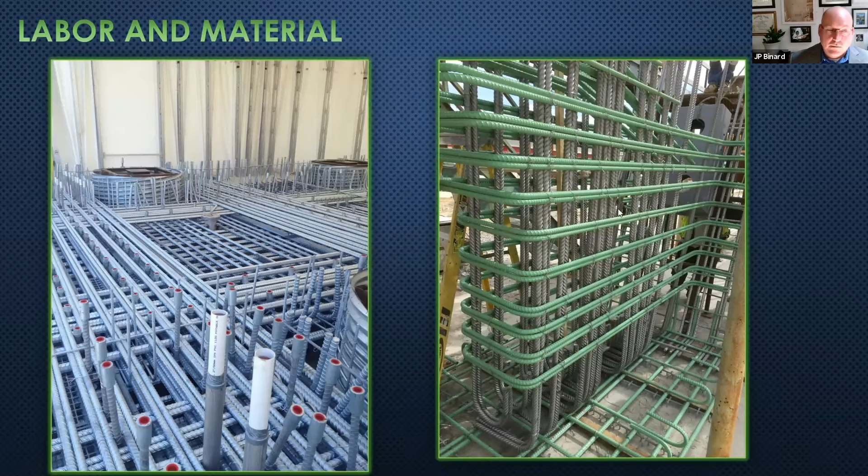Sorry, I didn't realize volume was on. Volume off. Okay, very good.

So piling is really our current task within PCI, or at least regionally. We're really excited about piling. The H-pile—there was a study done in 2008, which I'm going to show on the next slide. But essentially, you can get the same weight as you can out of steel. And if we're comparing to steel, not concrete, it's very cost competitive. You get the advantages of the weight you want out of steel, and the durability you get out of UHPC. So we're pretty excited about this.

You can see the effective pre-stress here on a section such as this. The section might be only about 60 square inches, and you're getting a 3.5 KSI effective pre-stress. For those who design precast pre-stress piles, you're usually around 1 to 1.5 KSI maximum, maybe in extreme cases 2 KSI. So we're getting 3.5 KSI on a material that has high compressive strength, which you typically don't need for piles because the soil interaction governs. That's the other advantage—you get more bearing out of this. Even though it's a relatively low displacement pile, you do get some bearing, which increases the overall capacity. We think it will also shorten the pile. So not only is it competitive on a cost-per-pound basis, it can be shorter, making it very viable.

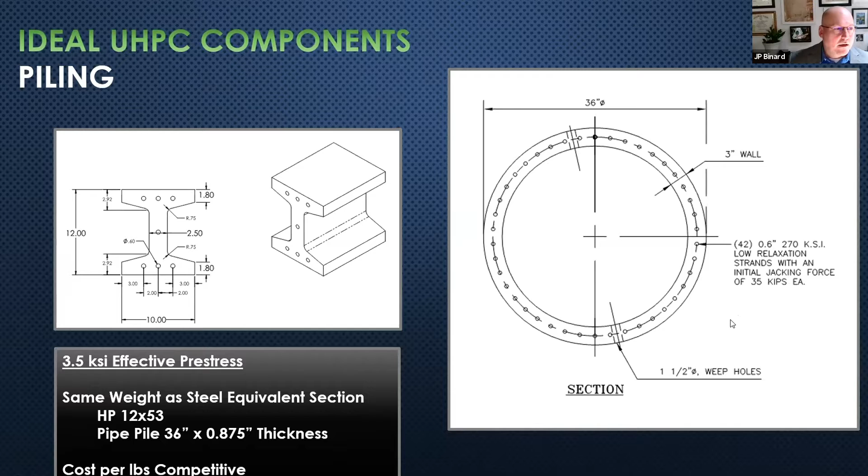We're going to do some pilots here in the next couple weeks on pipe pile. We think pipe pile is an extraordinary opportunity—there's a lot of pipe piles in the Northeast market, and we want to make them out of UHPC. So let me go through some rule of thumbs in a few other slides.

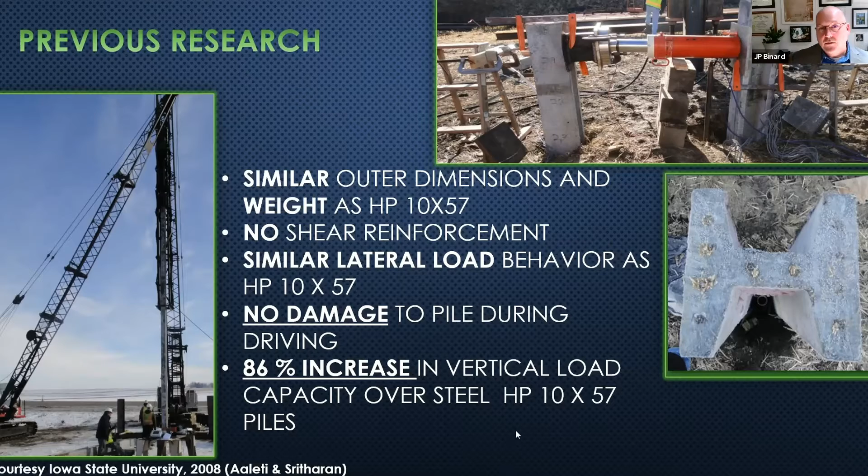So we're standing on the shoulders of giants. Back in 2008, research was done on UHPC H-piles. This was a 10 by 57 replacement—it was 10 inches by 10 inches and weighed 57 pounds per foot. They noticed it had similar lateral load behavior as the 10 by 57 on the weak axis. It had no shear reinforcement, and there was no damage to the pile during driving—I'll show you another slide of that. There was an 86% increase in the vertical load available compared to the steel piles. So this is a very compelling argument to use this type of material.

This was a 30-inch deep by 30-inch wide H-pile with a 5-inch web and 5-inch walls—not as small as what I showed previously, but again, they cast that in the 140-foot long piece. They were able to drive it as fast as they wanted, and the pile actually had a lot of stick up. So part of the research needs is to figure out exactly that soil interaction and how long the piles need to be.

Because if you have 40 feet of stick up, from economy of scale, it doesn't make a lot of sense. That's enough about piles for now.

Other components: slabs, deck slabs. There have been waffle slab pilot projects done in Iowa, which has been a leader in this industry domestically, with Dr. Sritharan and Dr. Aaleti. This waffle slab is from Wapello County. It was tested in punching shear, which was about 160 kips on a 2x2 prism—incredible punching shear resistance in a 2.5-inch thick shell.

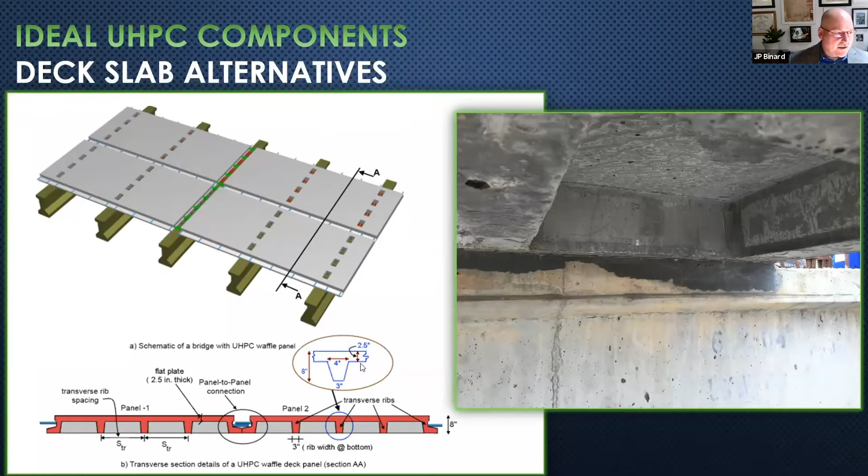There were ribs transverse to traffic and longitudinal to traffic, as you can see depicted here. It was mildly reinforced.

Well, I'm a former fabricator, and I don't necessarily care for longitudinal ribs in the direction of traffic. So we've been working on a different system with only transverse ribs. To be fair to Iowa State, they also studied this, but we've done a more advanced study using nonlinear finite element analysis, which we're going to follow up with testing soon.

This is a 10-foot spacing on the girders, and we alter where the HL93 loading is. We also checked fatigue and ultimate, and found that indeed you do not need the longitudinal ribs. The live load distribution was adequate, the deflection was adequate, and the stiffness of the system was better, as you'd expect, because it doesn't crack.

One interesting thing: we always think in stress, in pre-stressed concrete design. UHPC is a little different because we have that post-crack tensile strength, or sometimes hardening strength. So we're looking closely at operating strain levels. If 4,000 microstrain is your localization crack, which would be a big deformation driver, what's a good operating strain limit—not stress limit, but strain limit? That's something we're working on and studying, and I think it'll be interesting.

That's for mildly reinforced elements. If you're pre-stressed, it's an elastic system anyway—you're usually below your first crack, and that works well.

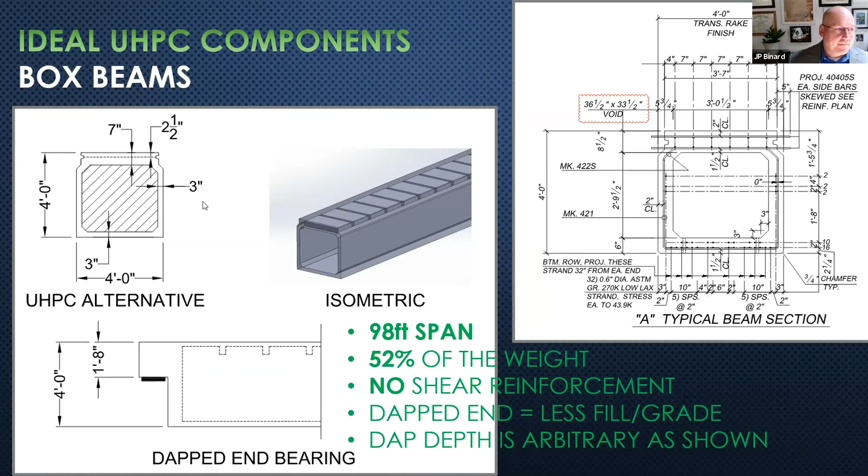So if it weighs 50% at 4 feet, why not just make it 8 feet and have less joints? Sure, why not - you can do that. I showed you a span of the deck, it was actually an 8-inch system that went 10 feet. So a 7-inch system that goes with double ribs at 8 feet is certainly viable.

But what if you just take your end zone of your long span girders, move your lifters way in for lateral stability, you don't have to worry about topside tension. You go from drape strands, 20 drape strands, down to all straight strands, making it a little easier to fabricate. You pour the middle with lightweight, so you bring down the weight of the girders.

You allow greater spacing, so you go from 9 girders down to 7. This job had 200 girders. You do away with any end zone cracks - these cracks were actually pretty big, so they had to be injected.

All of that value just by supplying UHPC at the very ends. So we wrote about it, we investigated it, and obviously 205 is an arbitrary number - it could be 300, it could be 400 if you can ship it by barge. That doesn't matter. What matters is that we looked at the joints between the UHPC and lightweight or normal weight concrete, as have a lot of other folks on Interface here.

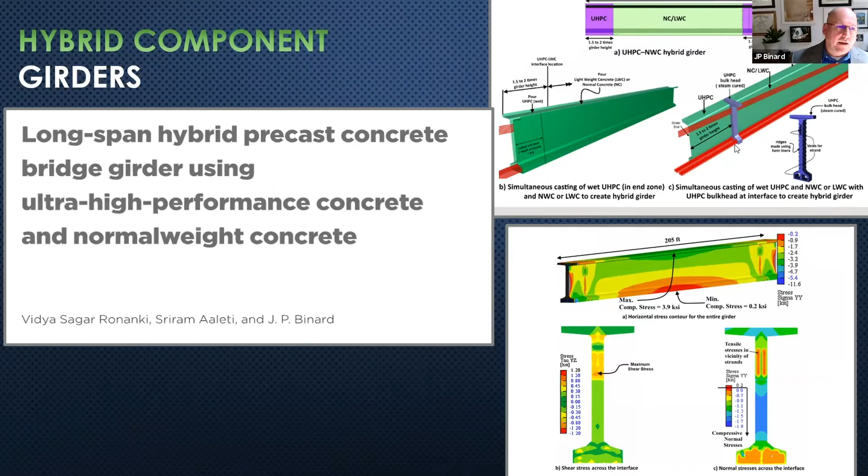Similar in concept, segmental construction. We've worked with the AASHTO segmental design manual led by Nick Amico from HDR. Parsons was on that, and a few other folks - a great group of people to work with.

So you can make a couple of the segments out of UHPC, make the rest out of normal concrete, or you could do something perhaps in the future where you're making some sort of frame like as shown - conventional versus this truss system.

So we do a lot of marine work. There are a lot of precast caps that are coming in the region as well. There's some fantastic research being done in FDOT on large bar diameter - this is preliminary, just FYI, but large bar diameter closures.

So you can see here that with 2 3/4 cover, you can develop a bar in 11 inches in UHPC. Typically your cover is going to be governed by your precast anyway, so you're going to have 3 inches of cover - I think that's pretty amazing. If you can go down to 1 foot closures on number 11 bars, then precast concrete caps certainly have a lot of viability.

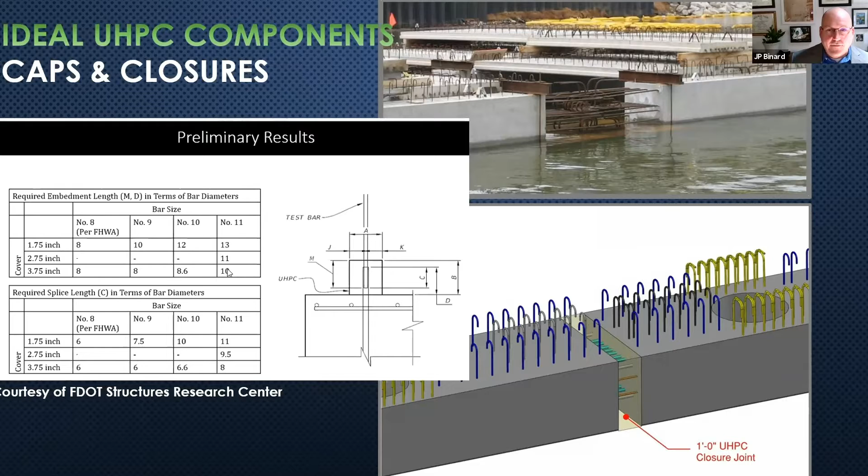And it's kind of just a general slide. We do a lot of shells, so actually check the shell. This is a 3-inch web. The 3-inch web has the same shear capacity as this entire composite element. So if it's non-composite or composite, it really doesn't matter.

You can do waterline footings like this. We've done large waterline footings. You can shell them out. You can corrugate the webs.

One of the main things is shipping. A lot of folks don't realize when you talk about cost, first cost or second cost, shipping becomes a major issue. So back to that hybrid element I showed you: reducing the number of girders, reducing the weight, decreasing the piling length. When you run through all those numbers, the cost to the contractor is competitive at that bid. So you have to really run through all of it.

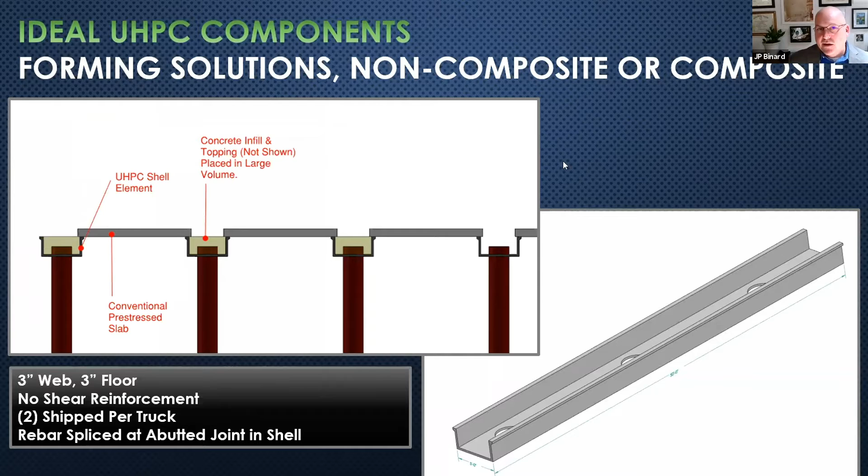The cost of the material may be expensive, but there are labor savings, and they get their crane savings too. Really, one of the benefits of all these things I'm showing you is that the means and methods of the contractor are essentially unchanged. So you're doing novel things with material, but once it gets to the crane's hook, it looks pretty much like concrete or steel.

At any rate, I always like to show this slide. I think it's very indicative of UHPC over the years: it's a really innovative approach, but I'm afraid we can't consider it because it's never been done before. This is starting to change, so keep an eye out for UHPC in the future. I'm sure more and more of the producers will be issuing ideas that you can use in your region, either as a designer or as an owner.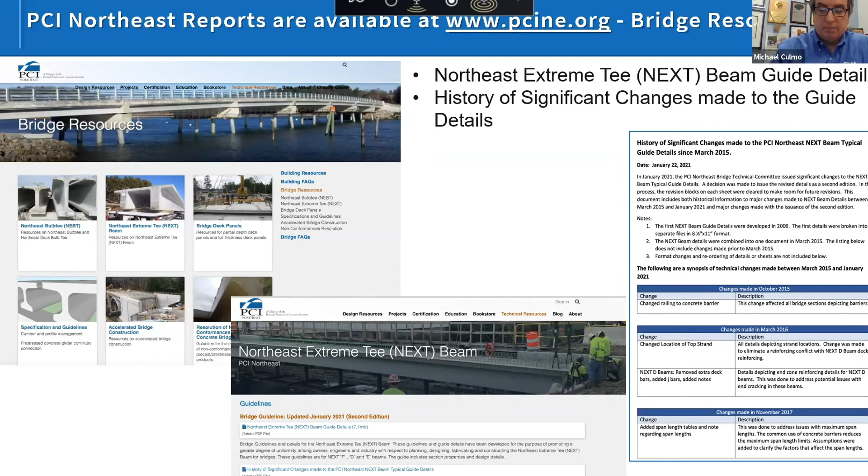As we move forward, we're seeing more and more states accept this as a standard, and the use has been quite exciting to see how many people are actually getting involved in this. It's been a tremendous success of our committee. Rita mentioned before the committee members, which includes state DOTs, consultants, and fabricators, so it really was developed as a collaboration between all those entities.

From day one, we always intended this section to be a fabricator-friendly section, meaning it's easy to build, easy to fabricate. We do not require forms to be broken down and assembled. It can be poured, lifted out of the form, and a new piece can be built quickly right after, which reduces the cost of the product. So that's something we wanted to do, come up with a cost-effective section for short to medium span bridges.

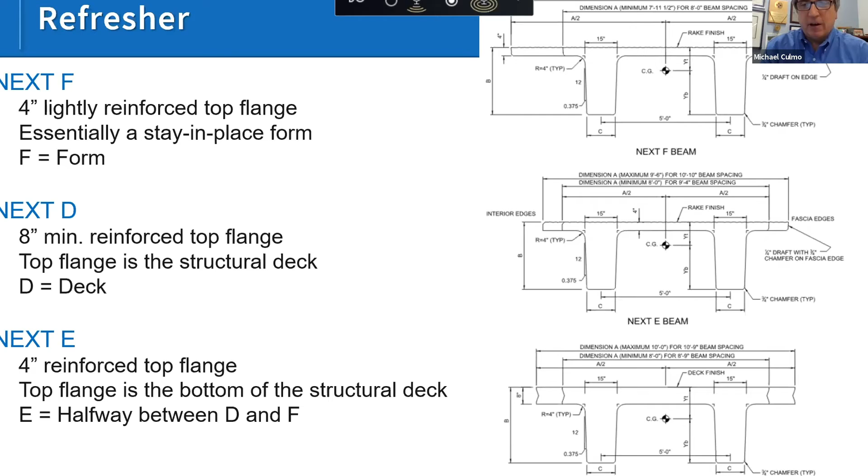Certain states use certain sections more than others, and that's fine. We offer details for all three sections in the guide details, and we offer design guidance for all three in the guide details.

So why did we update it in 2021? What drove this change? There were a few things. We wanted to improve on the details. There's nothing wrong with the old details that were in the previous editions, it's just that there was always room for improvement, and we had better ideas from experience to come up with better details and to make these bridges even more cost-effective and easier to build.

Another big change was in 2018, AASHTO produced the AASHTO LRFD guide specification for ABC, shown on the right here. I had the pleasure of being the principal investigator for the research project that developed this guide spec, and we included deck level connections as a big portion of this document, including UHPC. So we felt there was a need to update the guide details to be consistent with the AASHTO LRFD guide specs for ABC, since this is an ABC product. So that was a driving factor.

Another one was that Rita gets a certain number of questions from designers and owners about the use of NEXT beams. And the questions really point to a need for clarifications, things that we need to maybe put more detail on. Because if we see the same question asked 2 or 3 times, there's a chance that maybe our details are not totally clear. So we added a lot of notes and details to answer the FAQs that we typically get.

And lastly, the AASHTO LRFD bridge design specifications had some recent changes to debonding that dramatically affect NEXT beams. The reason why is because NEXT beams, as I said before, are considered a fabricator-friendly section, and one of the things we did to make them friendly was eliminate draping of strands. We have only straight strands with debonding. So obviously a change to the AASHTO provisions for debonding had an impact on the span lengths and design of NEXT beams.

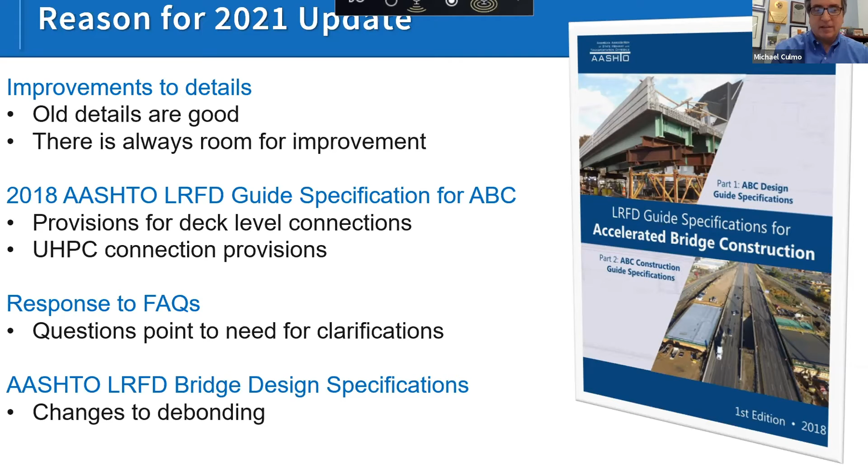So let's go through the changes that occurred in 2021. I'll pick them off one at a time. And the first one is change number 1.

We added additional information that we previously had on the website. We added introductory information, things like the committee members that worked on the document — they're listed here on the first sheet. We also added some nice pictures of completed projects and graphics, along with introductory statements on how and whereabouts the development came from.

Change 2, the frequently asked questions. Previously, these were listed on the website where you could download a FAQ document to answer questions you might have. We felt as a committee it was important to get these FAQs into the actual document. So we added them on the introductory pages in a 2-column 11x17 format. We went through the FAQs, updated some answers, added more FAQs, and organized them by subject.

We have 8 questions on general concepts, bridge geometry has 9 FAQs, design 14, deck and wearing surfaces 3, and railings we have 3 FAQs covered. So if you're going to be designing one of your first NEXT beam bridges, I really encourage you to read these FAQs — they answer 95% of the questions.

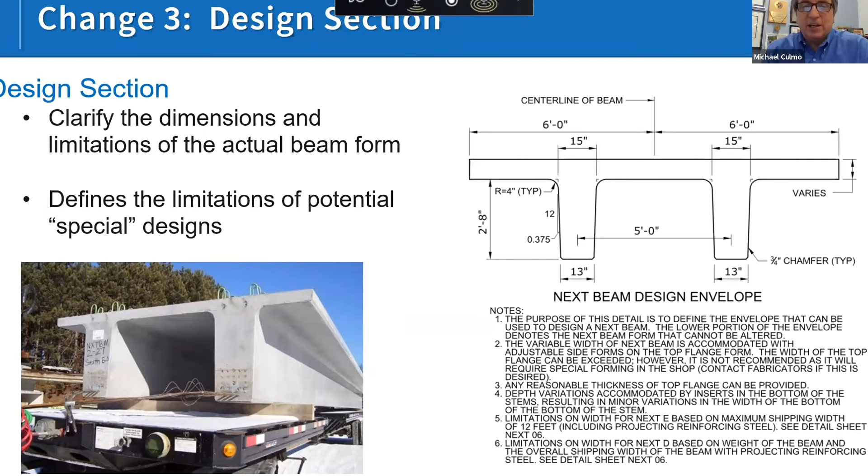The width of the stems and the spacing of the stems is a hard dimension because that's a steel form and that's where it's locked in. Items such as the thickness of the top flange can vary quite a bit, so that's not an issue. And the overall width of the beam is limited to 12 feet. So these are the major things that cannot change, but everything within that box can be modified.

I mentioned before, debonding limits have changed in AASHTO, and I won't go through those AASHTO provisions. It's about 2 or 3 pages of specifications, but we took a look at our NEXT beams and came up with recommended potential debonded strand locations for NEXT beams that are consistent with the LRFD bridge design specifications.

Key things to keep in mind: there is some interpretation as to what the AASHTO LRFD design specs call for with regard to double T's, outside strand and interior strands and things like that. So our committee went through the AASHTO provisions and came up with our interpretation of what the AASHTO LRFD is calling for regarding debonding.

As I mentioned before, the ABC guide specification is out, and we wanted to include that. So we have developed revised details for deck level connections, specifically for NEXT D and NEXT E beams, that are now consistent with the AASHTO guide specifications for ABC.

We also changed it such that you can use different fill materials. Previously, we had limited it at one time to 6,500 PSI grout. Now you can design this joint with normal concrete if you desire. You can use UHPC if you desire, and you can use high strength concrete or high strength grout as well. And we give equations where a designer can not only change the material, but actually design a joint to custom match the fill material you want to use.

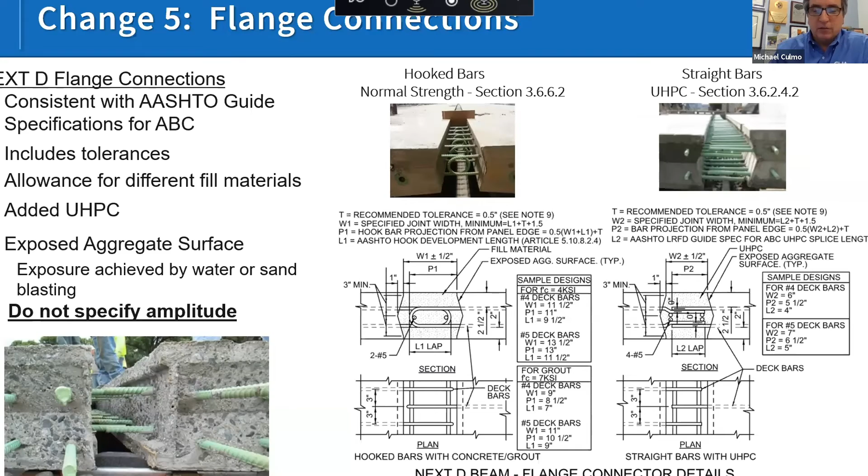So we've also developed similar details for the NEXT E-beams, similar equations and similar details where we are accounting for not only the width of the joint and the lap length, but also the tolerances and how to actually specify these joints so that they fit together in the field.

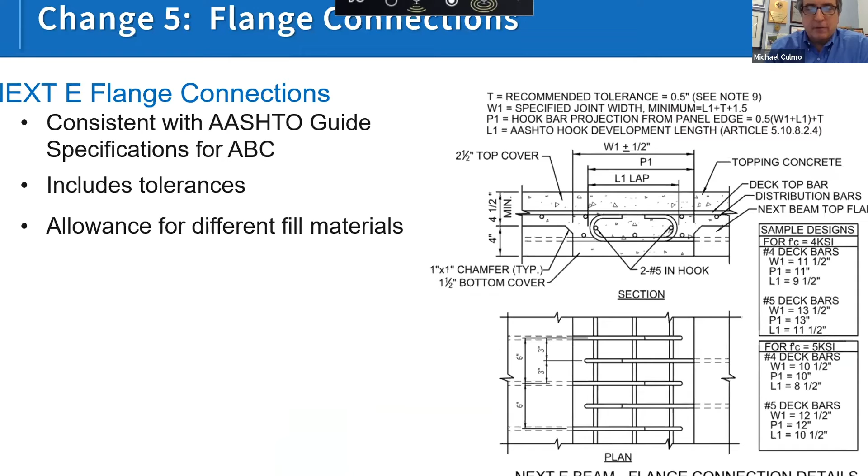Change number 6: we modified some of the skew requirements for these beams. Previously we had limitations that we've updated. We've also simplified some of the details. We'll go through that in the next couple slides.

I'll go through that in a minute.

We've changed the skew recommendation for NEXT beams. NEXT D's used to be limited to 20 degrees; we've increased it to 30 degrees, based on some of the details we've now developed. The previous limitation was also set due to issues with cracking on NEXT F beams, which I'll go over in a few minutes, but those issues haven't really manifested themselves in fabrication plants with cracking of D beams. So we've increased the skew to 30 degrees.

We're often asked, can we do a NEXT D at 40 degrees, or 32, or 31 degrees? The answer is probably. We're fairly conservative with these skew angles. If you need to exceed one of these, my suggestion is to contact PCI or a local fabricator and find out if they have experience with higher skews. I do know of NEXT D beams being fabricated as high as, I believe, 45 degrees, so it can be done.

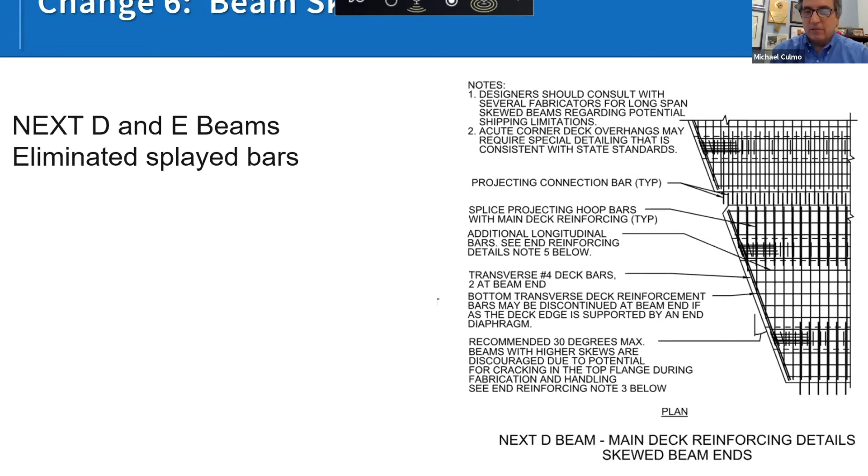This is just showing some of the simplified details. Previously, the NEXT D and E beams had splayed bars in the top flange. At some point we all realized that all of our details show an end diaphragm supporting the edge of the deck at the end of the bridge. Therefore, there was no need to splay the bars, and we can now keep the bars square to the stems, which greatly simplifies the details of these D and E beams.

Another issue we found is that there are provisions in AASHTO for longitudinal bars. This is change number 7. If your stresses exceed a certain limit in AASHTO, they recommend we add longitudinal steel, and these provisions have been in AASHTO for a long time. We were finding that some NEXT beam designs were coming out where designers were not following these details strictly.

We never showed longitudinal bars in our details; we figured designers would just add them. So we decided that maybe we should show them in our plan views. Here we show additional bars, with a very detailed note on when you need to add them as your stresses get high.

We made minor changes to diaphragms. This is change number 8. Previous versions of the NEXT beam guide details had dapped top flanges to facilitate concrete placement. As a committee, we now recommend that diaphragms be attached off the end of the beam, so we eliminated dapping the top flange. We're seeing some cracking issues from those dapped top flanges that were problematic, so again we're solving problems we typically see and modifying details to improve performance during construction.

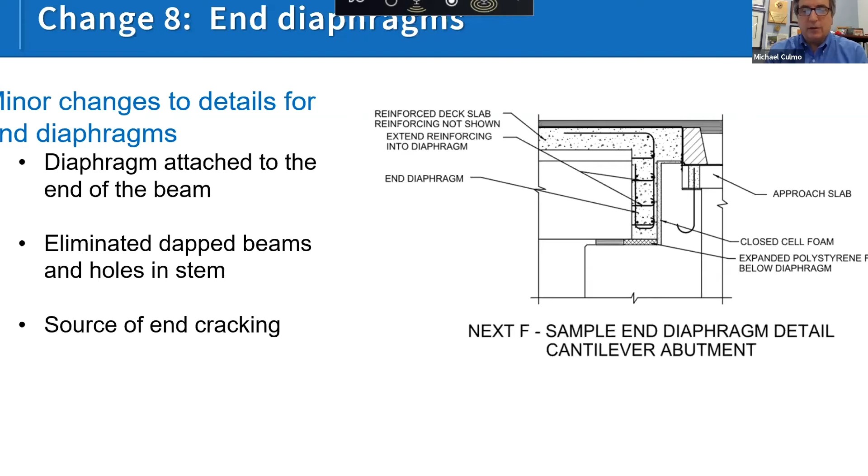Integral abutments require a more substantial end diaphragm. Previously we had shown dapped top flanges; we decided instead to square off the end of the beam, eliminate the dap, and add portholes to pour the concrete to cast that end diaphragm. Again, we're trying to simplify details and eliminate cracking problems in the field.

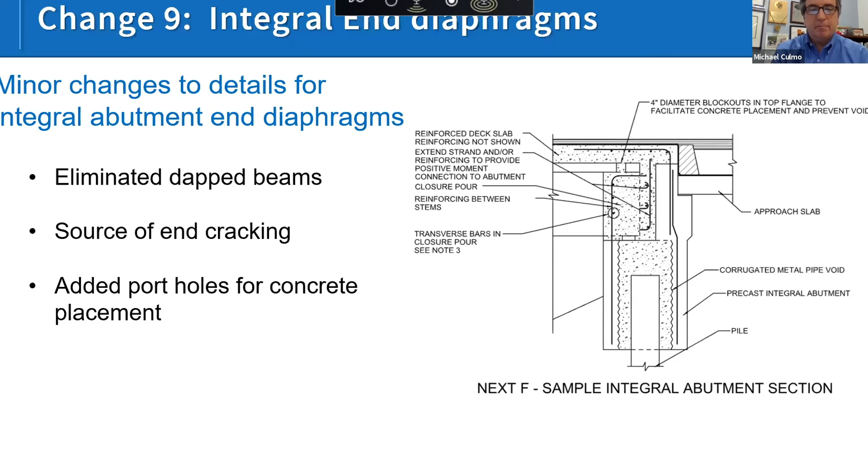Change number 10: on several projects with NEXT D beams, specifically with higher skews, the beam isn't seating properly on the abutments. This is brought on by a combination of skew and camber that causes the beam to teeter-totter on the two acute corners. You may want to consider adding an adjustable bearing. In reality you probably only need one adjustable bearing on each end, one out of the four bearings, to get it to seat properly—essentially going from a tripod to a four-legged table with an adjustable bearing.

These are expensive details, so we don't recommend them for every bearing, but keep in mind adjustable bearings are an option. We also have details for other bearing types with shims that can be placed for minor adjustments. We recommend you look at the details we have and pick the right one for your project. If only minor adjustment is necessary, you might not need something as elaborate as the adjustable bearing detail—shims are probably a much more cost-effective way to construct these bridges.

Change number 11: we had previously shown methods for hanging a utility on the NEXT beams. Some utility companies did not like the details where we showed threaded inserts on the underside of the top flange; some utilities prefer inserts in the stems. So we've now added details to show both options, with notes saying to coordinate with the utility company for the way they want to hang their product.

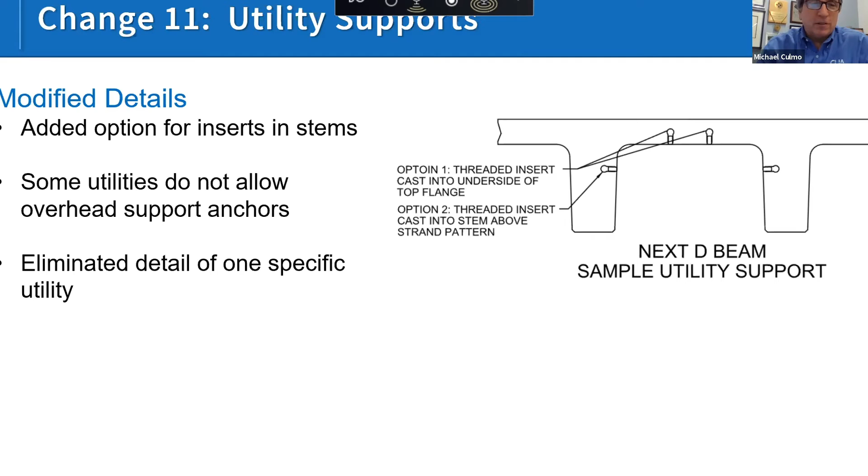Before we were talking about repair members, JP was talking about this before. We actually have repair guidelines that we've developed in the Northeast. It's similar to the national document, but as JP mentioned before, we've added substructures and deck panels as well. But we also have a repair procedure for the typical crack that we see with NEXT F beams that are lightly reinforced top flanges.

And again, it's a lightly reinforced top flange. We have added a lot of reinforcing to control this crack, but we still see the crack occurring occasionally. The key thing is the reinforcing we place in the top flange is to control the width of the crack, not necessarily eliminate the crack. It'll keep the crack tight.

But we have developed repair procedures if that crack is a concern, ways of sealing that crack to make sure that we have a durable product moving forward.

So in summary, the second edition has many improvements over the previous details. If you have a bridge designed under the old details, you don't have to run out and redesign the bridge. The old details are good, but we've now come up with improved details. So that's an important thing.

And again, I'll reiterate, the details we publish are recommended guide details, not standards. So there's no need to go back and rerun all your old projects. If you have time to do it, we encourage it.

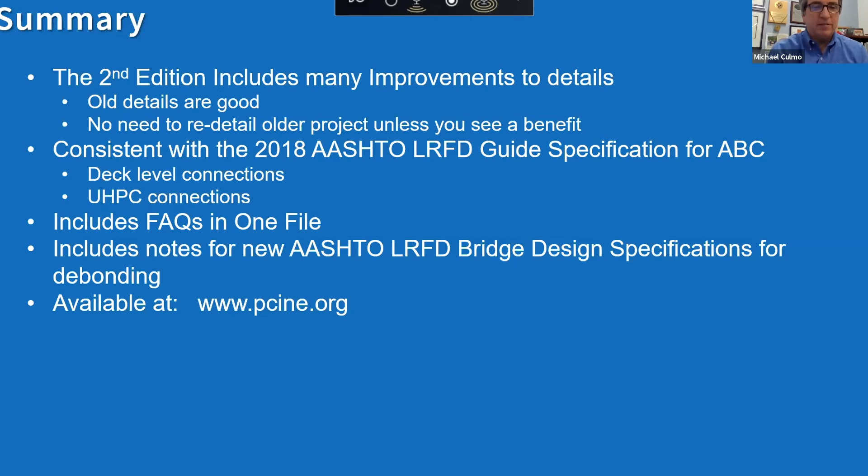And again, these are all available at www.pcine.org. And with that, that concludes my presentation. I'll be sticking around for the panel discussion as well if you have more questions to ask. Thank you.